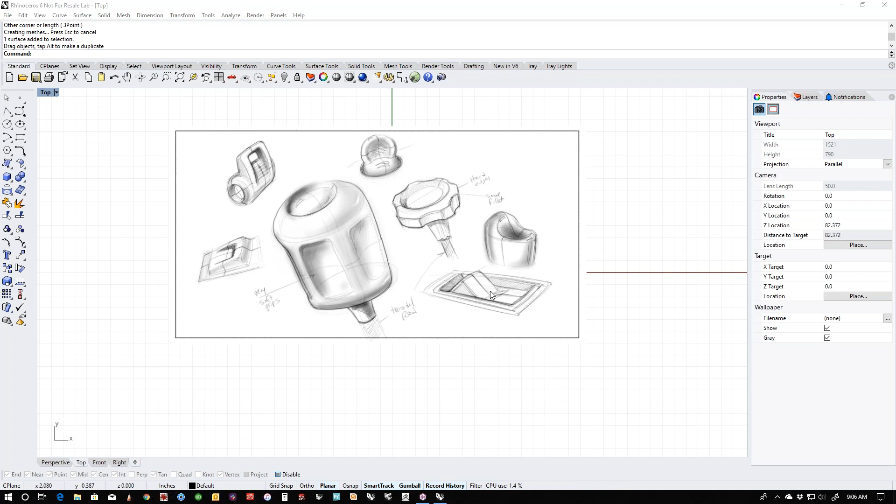So for today, I've decided to do a bunch of little knobs and buttons demo. I've built up a little portfolio of things here that we can take a peek at and try to go through. Each one shouldn't take a terrible amount of time. Maybe we'll get through all of them, maybe we won't. Maybe we'll just pick a few and go.

I'd like to try and get this done by about 10:30 or 11 at the very latest. So we'll start on a few of these and see how the time goes. Maybe we'll vote on which one to do next. But the one I'm going to start on is this guy.

The reason I like this one is because the intention is for each one of these grip faces to be very, very soft. Sometimes modeling soft things is difficult, because modeling sharp things is easy — you don't have to worry about transitions. Just trimming two surfaces together gives you nice sharp corners. Doing soft things can be a little different. So I'd like to start with this one and focus on that.

Then maybe we'll go over to this one, which seems like it would be very difficult, but there's actually a very easy way to do this one, so I want to show that. Then we'll pick a couple more depending on how time goes. Maybe we'll get through all, maybe we won't.

I'm going to stick this over here, and just to start this correctly, the way I start every project is with the picture command. I always start from a sketch, whether it's my own sketch or one that's been given to me. This is just the conversation I have with myself so I can sit down and start figuring out how I'm going to do this.

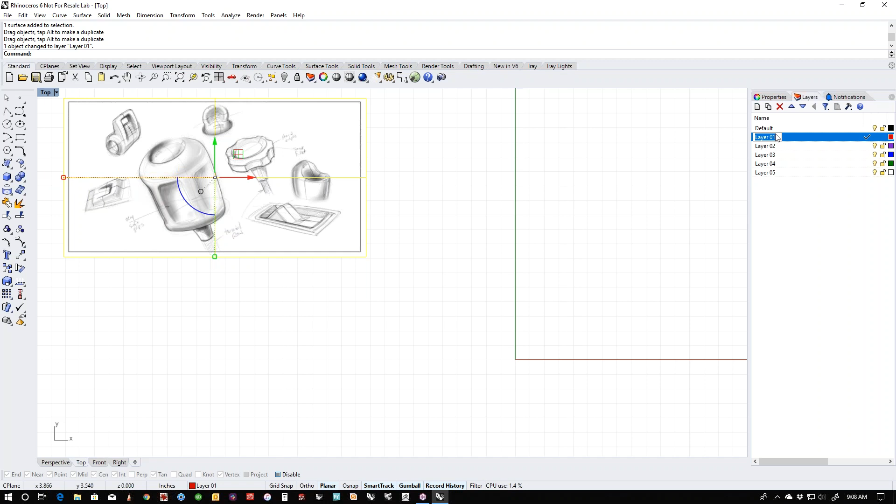So let's jump into this one. I'm going to just tuck this over here for the time being. In fact, I'm going to put it on a layer so I can turn it on or off if I need to. If I click on my layer stack and pick this object, right click and say change object layer, I'll double click on this and change the name — that's going to be the images. Then I can turn this on or off, and I can lock it so I don't accidentally pick it or do something like that. Then let's figure out kind of what we're going to do with this thing.

Basically, anything that's round, we're going to do with what? It's going to be a revolve, right? Let's be honest, there's no reason to do it any other way. Or is there? There's another way to do this that we'll talk about. Maybe I'll do this the revolve way to start with, and then we'll talk about the possibilities of doing this a different way.

Now, before we jump into this, we need to talk about how to make corners, or how to make transitions in NURBS. If I start with a single curve, right, and we turn the points on, this has got 2 points, which means all I can edit is this, or this. That's it, right? I've got no internal structure in here.

So if I want to make a corner, corners in NURBS are made with 3 points. 1, 2, 3 - that's how we make a corner. Now if we have to make another corner going down, how many points do we need? 1, 2, 3, right? If we're going to make another corner going this way, 1, 2, 3.

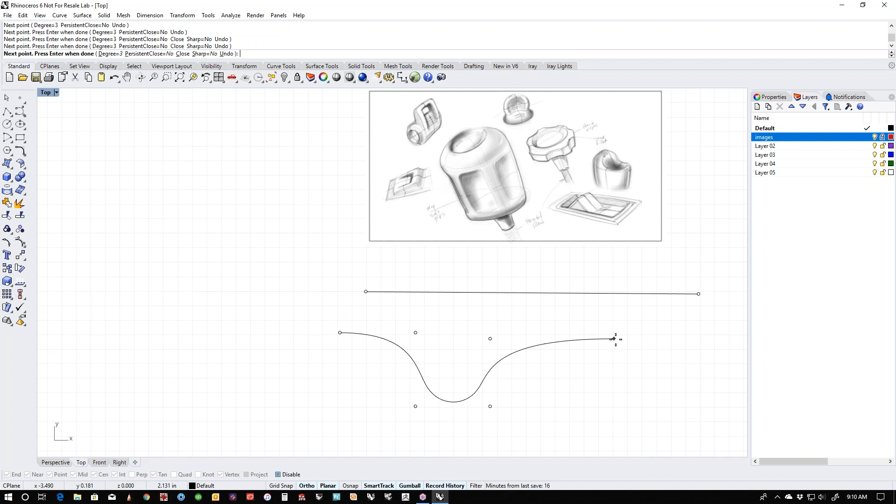We're starting to get the drift here. Now we can do this all in one shot - it doesn't have to be segments. We can go 1, 2, 3. Now we can steal this point and go 1, 2, 3, and then we can go back up here, and then out here. And each transition, if we look at it, is made up of 3 points.

1, 2, 3 makes this corner. 1, 2, 3 makes this corner. 1, 2, 3 makes this corner. 1, 2, 3 makes this corner, right?

Does that make sense? If we wanted to make this sharper, we would start with an anchor point, and then do 1, 2, 3, drag a line. 1, 2, 3, drag a line. 1, 2, 3, drag a line. 1, 2, 3, right? Corners always have 3 points.

They have to. If we want to make them sharper, we pull them closer together. If we want to make it softer, we pull them farther apart. But always 3 points - that is the formula for a corner.

Now, knowing that, when we build this part, what do we need? Let's go back to this. If we look at this curve, there's a little flat here - maybe it's a flat, maybe it's a round - but there is an obvious corner here, and then there's a dip, which we're going to call a corner, and then it comes back up. We're going to call that a corner, and it comes back over. So this shape is going to look like this.

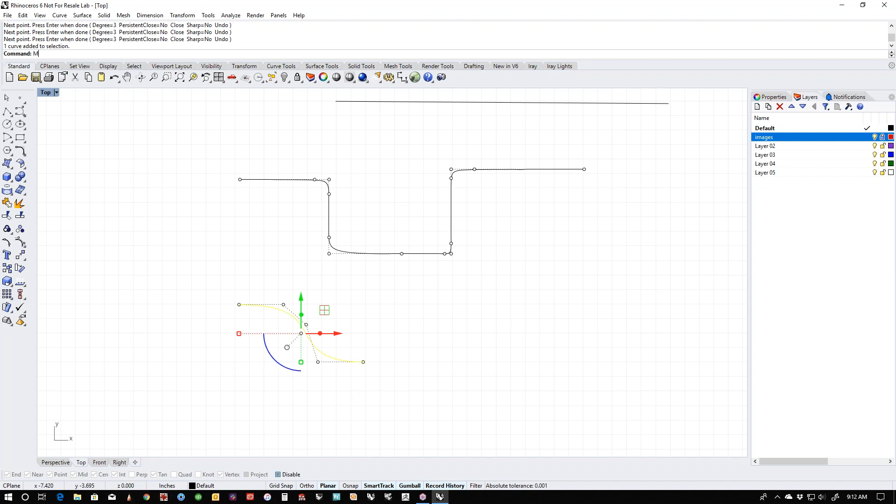Let's call this our flat and say 1, 2, 3. And then I'm going to steal these points, 1, 2, 3. Let's call this our profile. And if I mirror this, and for tangency's sake, if I pick all of these points, notice how there's no handle here? In order for these points to be tangent, they need to be in a straight line.

And we can prove that by drawing a straight line. See how these are all lined up? If this point was here, these curves are not tangent.

And we can prove this if I run the GCON command and pick here and here - these curves are actually G2. It's saying I'm getting a curvature match off of this, even though strictly speaking it's tangent because it's G0, G1. The G0, G1 points are lined up. But because this is the same curvature going in and out of the curve, it's actually calling this transition G2. I'm not going to get too far down into the weeds with that.

But let's call tangent the 0 and 1 point. Let's call this tangent if these are lined up. Still tangent as long as they're lined up in this direction. Still tangent if they're lined up in this direction. Still tangent if they're this far away. Still tangent if they're very close.

As long as these 3 points make a straight line, you're tangent. So with that understood, now we need to do some counting. For each transition, we need 1, 2, 3, 4, 5, 6, 7, 8, 9, right? 1, 2, 3, 4, 5, and then 1, 2, 3, 4, 5. So we really need 9 points total if we're calling this one a coincident point.

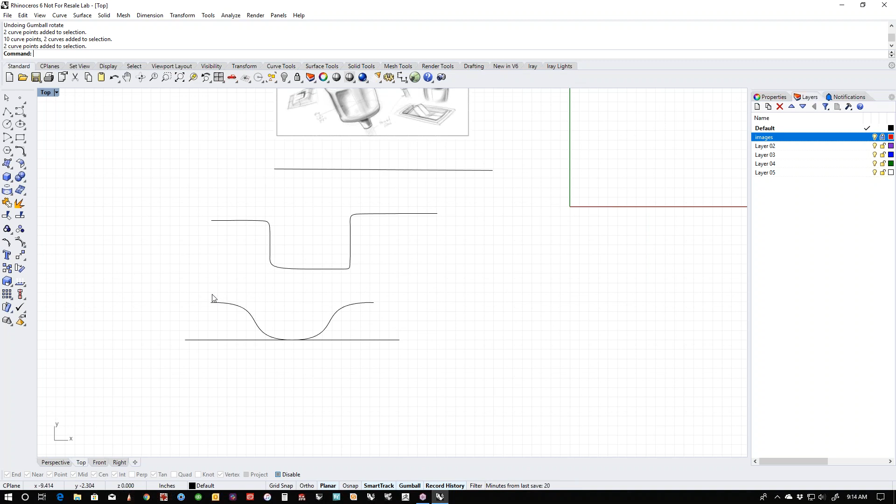Now, 9 points times 6 dents is going to be what? 9 times 6, right? So if we were to take this and copy it from here - 1, 2, 3, 4, 5, 6, right? 1, 2, 3, 4, 5, 6.

This is how many points that we're going to need. Now, assuming that these points are joined, if I take this and join these all up, it'll give us the right point count. Or we could do something silly and just add it. But if I join this all up and turn the points on and do this, it's got 49 points, right?

And if we count: 1, 2, 3, 4, 5, 6, 7, 8, 9, 10, 11, 12, 13, 14, 15, 16, 17, 18, 19, 20, 21, 22, 23, 24, 25, 26, 27, 28, 29, 30, 31, 32, 33, 34, 35, 36, 37, 38, 39, 40, 41, 42, 43, 44, 45, 46, 47, 48, 49, right? You're like, wow, he can count.

So we need 49 points in order to be able to make this type of shape. So it's a long way to get there.

Stay with me. If I take a revolved surface, how many isoparams, because isoparams equals points, right, how many isoparams am I going to need in this revolved direction? The correct answer is 49. What that's going to allow me to do is then revolve this thing, pick the points, and just scale them. And when I scale them, we're going to get this type of shape.

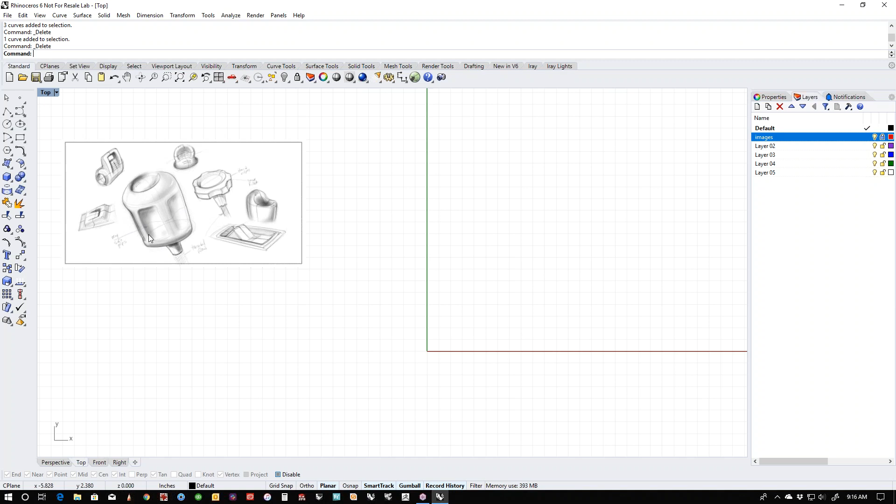Now, so we know we need 49 points in this direction. How many points do we need in this direction? Well, that's a good question.

If we were to start up here at this surface, because this is going to be a straight line segment, this is going to be a little arc to get that shape. If we were to start here, there's a round here, right? So we're going to need 1, 2, 3 in order to get this shape. And then there's a corner here, right? So there's going to be 3 more here. And then there's probably going to be 3 more at the bottom. So what's that, 9 now?

We're going to probably need 3 more at the bottom here to come up. So that's 12, 13, 14, 15. And then probably a straight line, so 16, 17, 18, 19. We're probably going to need 19 or 20 to get this shape because I'm going to need enough isoparams in here to be able to grab points in this area and pull them in.

So let's give it a shot. Let's just draw this thing starting. I'm going to start up here. I want to give myself enough space to make the arc. So I'm going to start here and say 1, 2, 3 to get my big roundy. And then I'm going to turn the corner and then I'm going to just draw it as a marshmallow for now because we can always rebuild.

And I like to do things as simply as possible. I'm going to bring this over to here, something like that. And then I'm going to add a line up here for this piece. And then I'm going to add the little hosel down here, something like that. That might be really thick. Something like this.

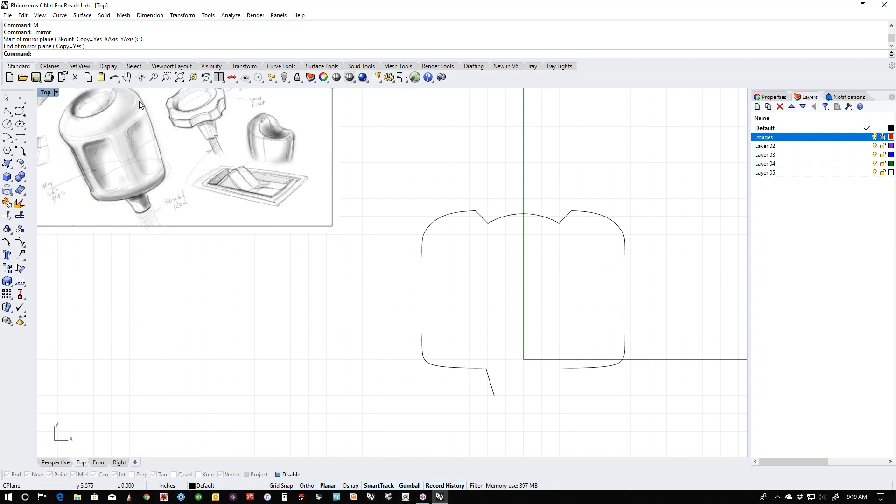The other thing that I might want to do is mirror this just to see how fat this thing is. And this is looking massively fat. Like this is kind of normal, a little narrower. So let's edit this. I'm going to turn the points on and just pull this in a little bit, make this a little narrower. Maybe it needs to be a little taller to get the proportion that we're looking at.

And granted, I don't have enough points in here to make this shape, right? And I don't want to just spin this shape because I need these pieces out here.

So maybe what we're going to do is, first of all, I'm going to make myself a center line and get rid of all of this because I don't need it anymore. That was just for reference. I'm going to take all this stuff and join it. Actually, I'm going to bring this and close it too because I want this thing to be closed. I'm going to take all this stuff and join it.

And then let's go ahead and just revolve it. And let's see where we are. Let's just take a look. So we're going to come down here and just make a simple revolve.

We're going to make it full circle, so we'll just type U, enter. If you look in the command line, each letter is underlined - the F in deformable, the U, the A, the S. If you type U and hit enter, it invokes that command right out of the command line. It's a really fast way - you don't have to go up and click, you can just look and say boop, and get it to go.

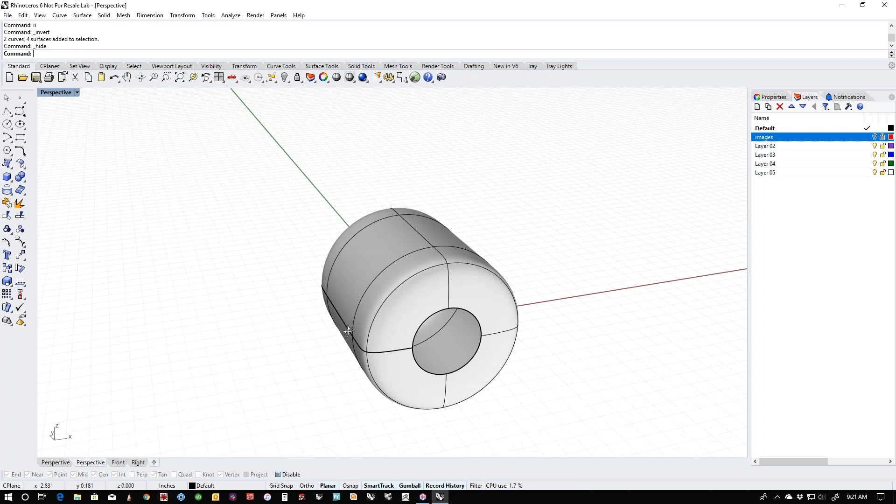And I'm going to hide everything. By the way, I have a hotkey set up for the isolate command. If you don't know it, pick this and type isolate - I'm working in version 6, by the way - and hit that, it gets rid of everything except what you picked, which is super useful if you're like me and can't stand clutter on the screen.

I gotta grab some coffee. Hang on just a second.

All right, so we've got this thing. Let's turn the points on. You can see if I select any of this, pick this, SelU. SelU is the command to select all the points in the U direction. How many points do we have going on here, right? And I can do that by typing what?

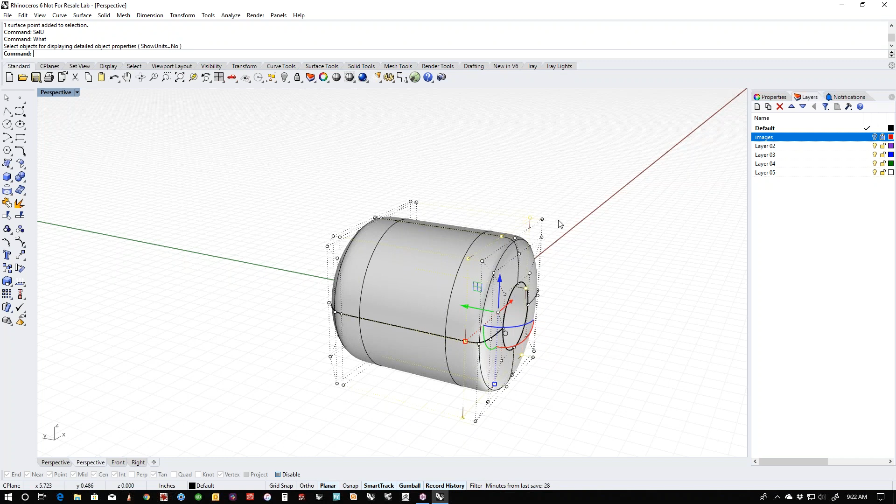SelU - it should tell me how many points are selected. It doesn't. What doesn't work on that? Come on. Nope, got to be just the object. All right, never mind, so let's do this.

I want to drag select them so I can see how many points there are here. I could count, but I'm lazy. So there's 8 surface points here, and we decided we needed how many? We needed 49, right? So that puts us in a position where we have to rebuild this thing.

So let's rebuild it. We know that in the U direction and the V direction it says 8 and 8. In the U direction, which we've already determined is this way, we need 49. And we can preview it and check that.

And then how many points did we decide we needed in this direction? I think we decided we needed like - 1, 2, 3, 4, 5, 6, maybe 7, 8, 9, 10, 11, 12, 13, 14, 15 - let's say like 15. Let's try 15 and see what we get.

And we want to change this to 3 and 3. Let's preview it. That's about what we're going to want, right? And look at this - look at all these wonderful points we have to play with.

Now here's the trick: we need to be able to select these points in order to modify them in a way that makes sense. And because there's 49, we want to pick these, and we want to end up with 6 total.

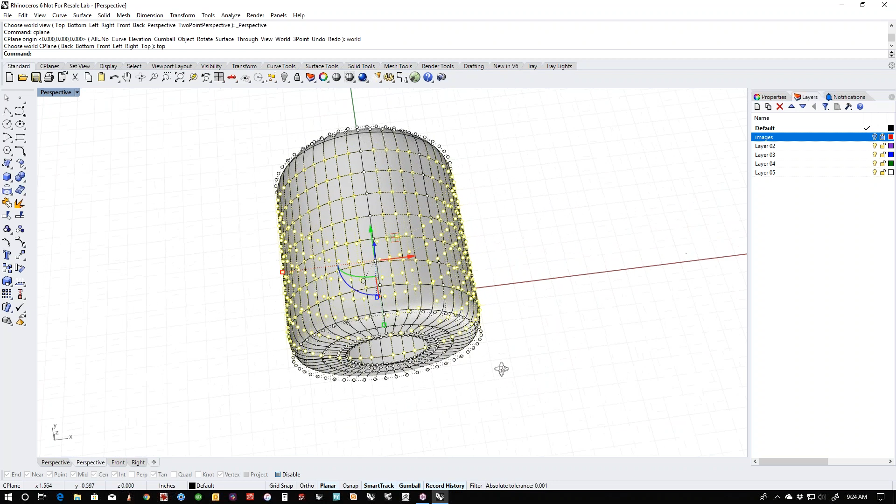So let's pick this. Now, just to show you what we're going to try and do, I'm going to deselect everything else - the other way we could do this is we could just model a section and then mirror it, which might be the way we end up doing it. Like I said, I don't practice this stuff, I have to figure it out along the way.

So if we grab this and I were to scale these points inward, right, then I would get - and if we do this scale, actually let's do it with the gumball, because I like using the gumball instead. So let's relocate the gumball.

Gumball relocate is the command. And the gumball origin is going to be in the center of this object, if I can get it to snap to the center. And if it won't find the center, we'll make it find the center by doing this. Actually, the origin is the center, isn't it? That would make sense.

So let's grab this again. Let's grab these, and make sure we're getting the same amount on either side of the center line.

Let's get rid of these. Yeah, because this is my corner, right? 1, 2, 3 - these points here can determine how sharp this corner is. These points up here determine more or less how sharp this corner is.

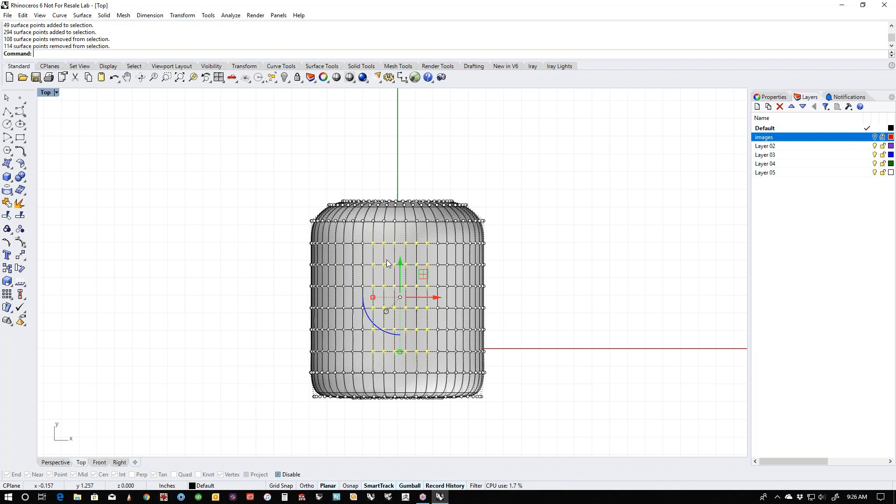So let's do this, and I'm using Control to deselect. Let's just make sure that on the same side of that we have an even number, right? 1, 2, 3, 4, 5, 6.

And if I get rid of those down there and I relocate the gumball to 0, that's going to put me right in the center of this object. Now, if I shift scale this, look what happens - I get my really nice transition. Now, am I stuck with this?

No, because I can do things like this. I can come in here and grab these points. And if I was really trying to be fancy, I would try to do all this at the same time. But if I pull this up, see how this affects that corner up there? And if I grab these...

This might be easier to do in wireframe, but it's harder to visualize for you guys for the webinar, so I want to just keep doing it in shaded view. These control this down here.

This row - remember we talked about that curve - if we pull them apart, it gets softer. If we pull them closer together, they get sharper. So this row...

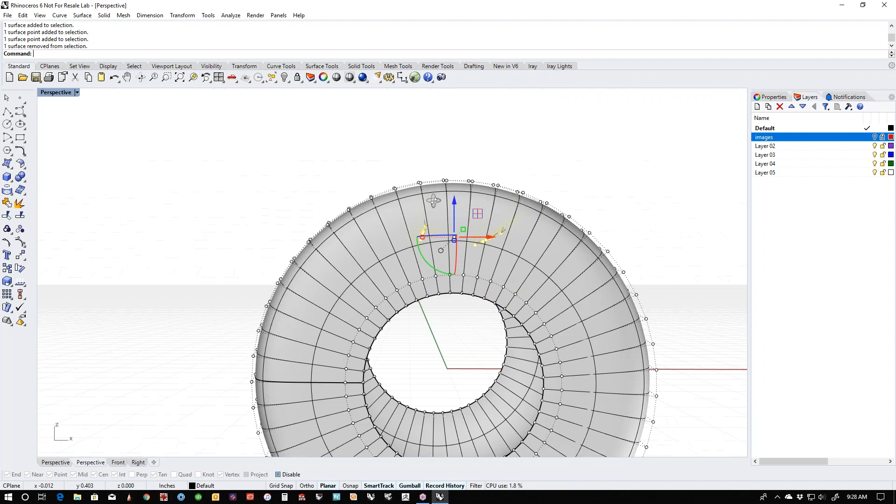So if I'm messing with this row and this row, let's make sure I got the right one. No, I don't - let's make sure. Let's do this. Doop. It's this row that we want to mess with. So I'm shift clicking each one of these to add.

Sometimes the gumball handle gets in the way and you have to wiggle it a little bit to get around it. And then I'm going to scale this in this direction. See, I can make that really sharp or really soft.

So just by manipulating these points, I can determine how soft or how sharp I want this to be. And if I pick these things and now mess with them, I can come in and design this thing in 3D. If I pull it up...

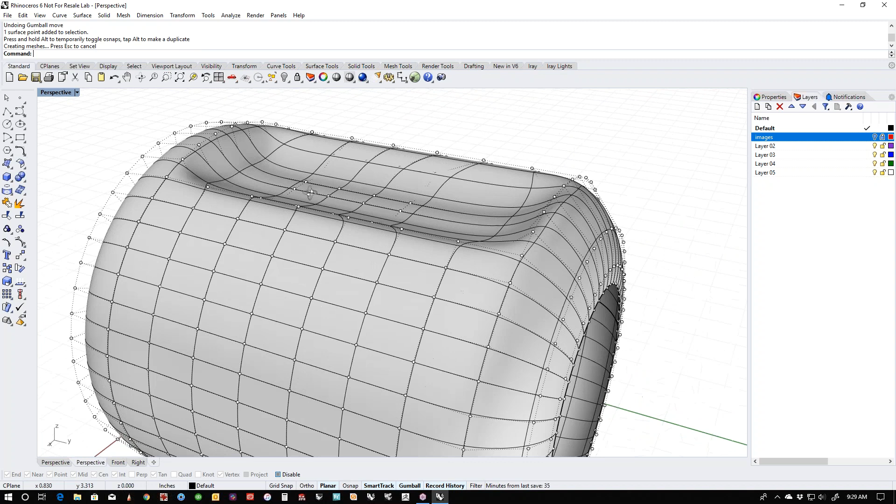Let's make sure we get everybody - that one's hiding behind the scale handle. If I pull this up, see how that softens? And if I pull it down, see how it sharpens? So I can kind of tune this thing to get it how I want, and then decide where...

I want all this stuff to fall. And so just by dragging some points around, I get a lot of ability to be able to determine where this stuff goes.

Now, here's an interesting thing that just happened. See how I grabbed these points, but I missed this one? Watch this - if I grab this guy, if my gumball is set to snappy dragging, it will respect O snaps, meaning that I can just drag it up, hold down my O snap. I run my O snaps disabled, by the way, and the Alt key is the temporary enable/disable. So as I'm dragging, if I hold down Alt, it'll snap together.

Now another cool trick is if, let's say, this guy is out of line with these guys, I can scale these to 0 in one direction, which will flatten them and then snap it back into line with the other ones. It's a nice little modification trick. Excuse me.

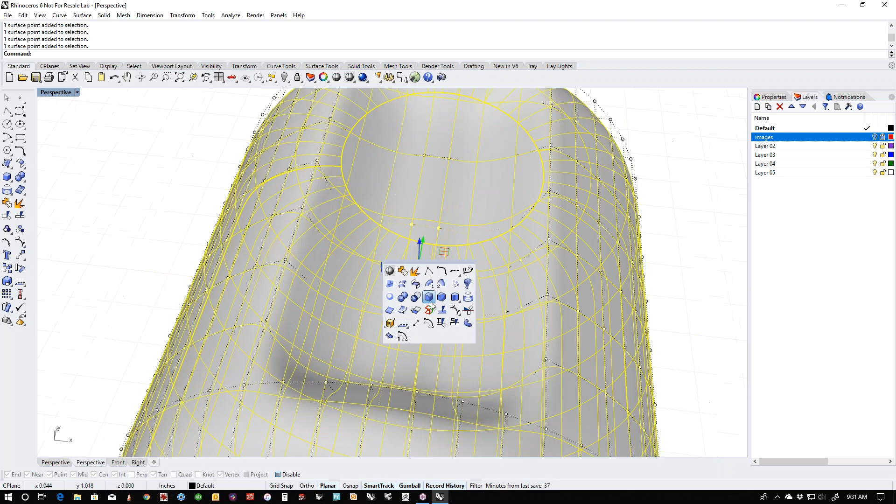All right, so let's shade this and see, do we like that? Is it the right shape? Is it too deep? Is it like maybe these guys, we want to punch them in a little bit? And do this in wireframe so I can see what I'm doing. Got to catch the ones that are hidden behind the gumball handle.

Because we know how the numbers work, we can modify this stuff and know exactly what we're doing. So now this is going to be dished in, now it's going to be pulled out. We can play with it and really get a nice little pocket in there.

Since we know what this is like, we could go ahead and model this in all the way around, or we could be super lazy and just scale that, or just do an array. So let's take this and make a polar array at 0. We want 7 items, right? Or no, 6 items. We wanted 6 items. And we're going to polar array this thing.

Now this isn't in the right orientation, so I'm going to take all of this stuff, because I did it with history on. See this? I can take this guy and revolve it, or rotate it, out here like this, and I'll just snap it to that point. And then all the rest of them are going to update, and that's not quite what I wanted.

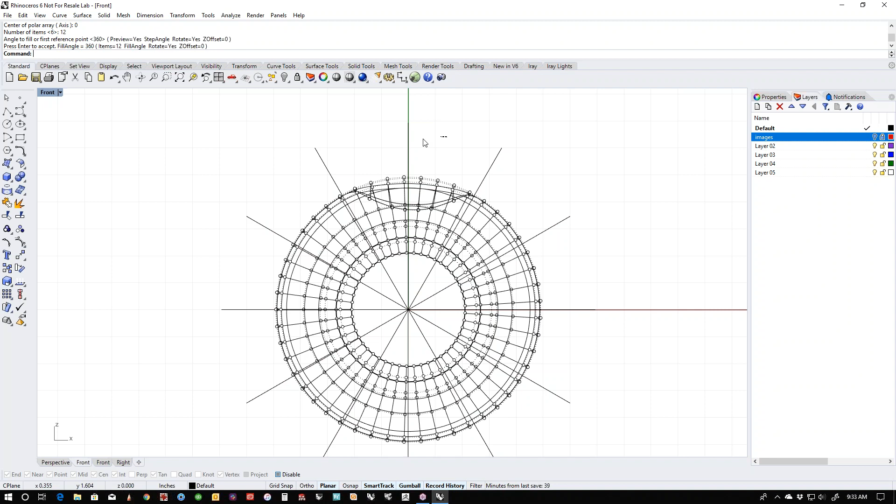And what 12 is going to do is give us, this is the center of this thing, and these two are the ins and the outs. And you know, maybe these points, see how these points aren't exactly lined up at the center?

So maybe what I need to do is take this and rotate it to snap to here, and then see how that's centered now. If I'm calling this the center of my dip, I could probably be fancy and figure that out, although it looks like it's not. Actually, it looks like what I need to do is be right between these two, isn't it? Because it's that and that over there.

So let's do that. Let's rotate, and I'm going to use the between switch. Watch this—I'm going to hit P, enter, and place it between these two. Oop, moved it, sorry. Center of rotation, this is the first place. The second place is going to be between here and here. So now that's centered, and I can take this and trim everything else away.

People are like, you weren't kidding about not rehearsing these. Yeah, I'm not. And I've got my one little segment.

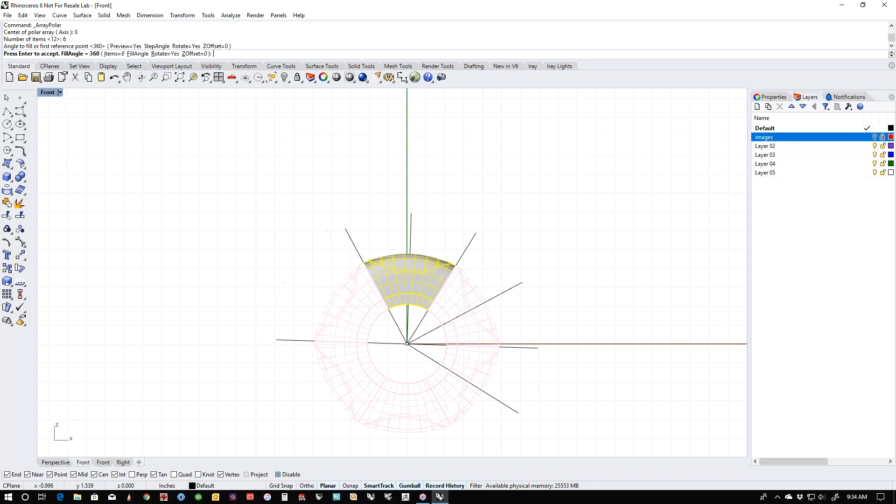Now, if I go back to my front view and array this around 0, 6 times, it worked. No one's happier than me. We get this.

Now we join it. If we're living right, this is all going to join up with no pink. We bring back the rest of our stuff. This joins up, this joins up. Let's hide everything else, isolate, and then let's take a look at it. What else do we need to do to this thing?

Let's break this edge, and I'm going to do that with a fillet—actually, I'm not going to use a fillet. If you right-click on this, you get blend edges. The blend edges is different than fillet. Fillet is circular, it just takes a circle and shoves it in the corner, right? It doesn't have any respect to tangency or anything like that. In fact, fillets are usually at best G1, most often G0.

Blend, on the other hand, if I right click this, it actually does it by continuity. Oops, got a little edge there. I'm going to chain the edges so I get everything. And then the radius on this is 1 unit.

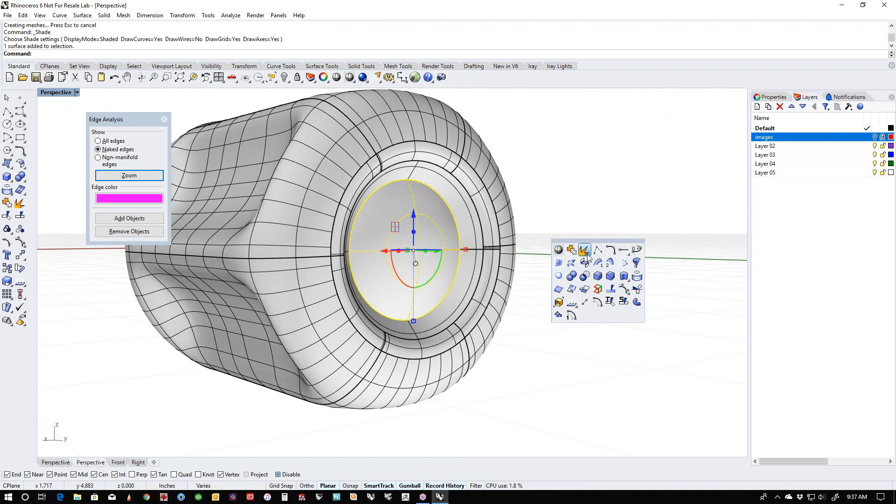And that gives us a nice soft edge. We can even go one step further—I'm assuming this is going to be like a logo insert or something. So maybe what this even needs is a pocket with a secondary little lens or something, which we can do if we break this out, take this, pick it, and start dragging while holding down the control key.

It actually extrudes it. Let me isolate that and show you again. If you don't use this trick—pick on it, start dragging, hold down control. See that line that shows up? Boop, we just extruded that thing.

Now the cool part of this is I can take this and break this off, bring this back and hide that. And you can see this is the pocket that we built. And maybe there's a microscopic little fillet on this, because that's how the world works.

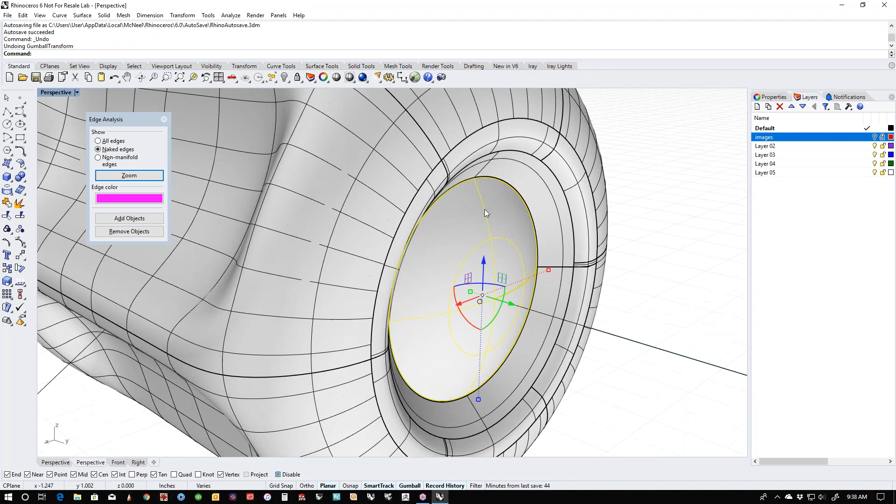If we're really getting fussy, there's no such thing as a 100% short corner or 100% sharp corner. We bring this lens back. I'm going to scale this, shift click, 0.99. Just a teeny tiny bit, maybe not even that much. Shift click, 0.999. Just enough so that I have a little clearance. Maybe that's not enough. Let's say 0.995. See how it just gave me a tiny little bit of breathing room in there?

Then let's go to the right-hand view. I'm going to do the same thing I did before. I'm going to start dragging and then hold down control, and I'm going to compare it to that. I'm going to just kind of bring it so that it just kisses that.

Because I want to be able to, maybe I want to print this thing in plastic and print this in clear, and I want to have that be something that I could put a label or something. This is going to be clear. And then I take this and it sticks in here like this, and it's got a little logo with a little clear thing over it.

Okay, now the last thing we're going to do, I'm going to delete the curves for now. Usually what I do if I'm working on a client project is make a curves layer and dump everything there. The reason I do that is because if your clients are anything like mine, they say we love it, except we'd like you to change everything. So if I have my curves, it makes it easy to do, and we'll go from there.

Now I want to break this edge. I don't like that, so let's blend this thing. I'm going to chain edges, gets everything. Whoa, since I have preview on, see how that's crazy? I don't want that, so let's bring this down. There we go, that's much better. Preview's nice because it's non-destructive, you can try it and see what it's doing.

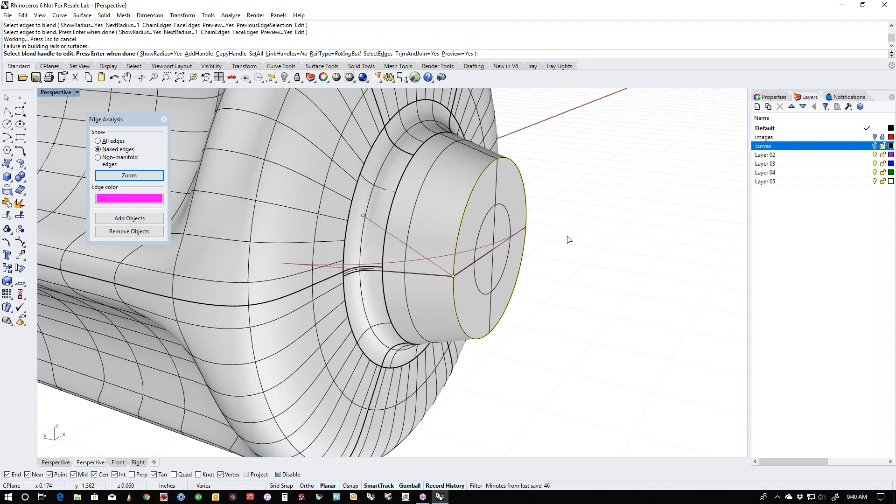And then I'm going to break this edge too, and that's obviously way too big, so I'm going to drag this down. Now, if I was doing this for a production piece, I would actually pay attention to what these numbers are. Let me see if I can do this in wireframe so you can actually see this. See how this number, as I move up, you can read what the numbers are, and if I look visually and say that's about the right fillet.

If this was up here, right, and it was .037, what I decided I wanted, I wouldn't do it at .037, because if this were to be CNC machined, I would have to either go in with a .03 tool, which would be a common size, and do a couple of passes through here, or I'd have to get a custom tool made, which the tool maker is going to hate you for, a .037 tool to cut that in a single pass.

So let's be easy on our tool makers, and let's say I'm just going to push that to .03. That is a common tool size, and I know when I send this to my tool maker he's not going to go, what are you kidding me, there's a .0373216 radius fillet in here. He's either going to do it and charge you for the custom bit, which makes your job more expensive, or he's going to call you bad names, which is usually what tool makers do. No disrespect, that's well within their right to abuse designers.

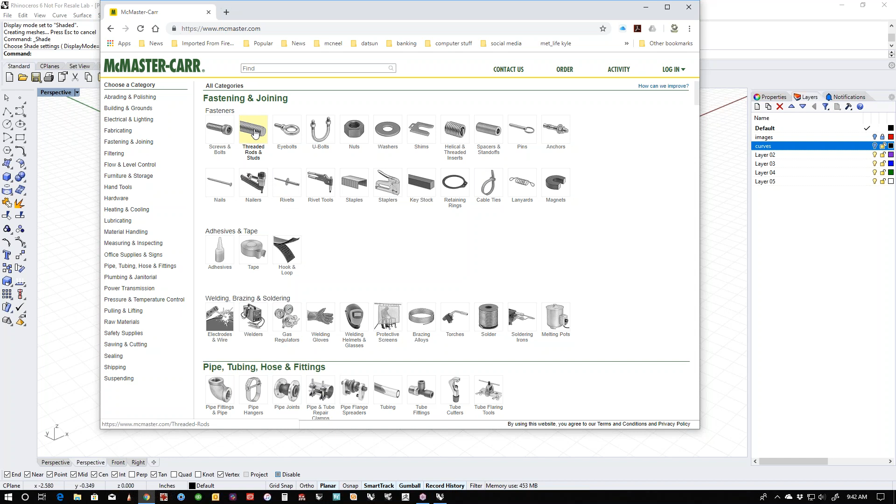There's a website, a company here in the U.S., for those of you who are outside the country and maybe haven't heard of these guys. They're in Elmhurst, Illinois, founded in 1901, a privately held company called McMaster-Carr. If you click on this, it brings you to the holy grail of all things fastener. If I go to threaded rods and say threaded rods here, who cares, let's just go with this, and I want this to be, let's go back one because I want it to be metric.

Let's go metric. I want this to be a metric threaded rod. I have no idea how big this thing is. Let's find out.

I probably built this massively, but let's go from here to here. So it's 0.39, so it's like 0.8. I think this is inches. Let's make sure - tools, options. Things you check beforehand. Yeah, this is inches. So like 0.8 is about the size of this thing, somewhere in there.

Let's see what a diameter of 10 millimeters looks like. That is probably a little small, so let's see what a diameter of 12 millimeters looks like. That'll probably do it. So we're looking for like an M12 bolt or a threaded rod.

So let's go to M12, and let's say it's going to be 300 millimeters long. It actually doesn't really matter. Let's get a longer one, say 500 millimeters.

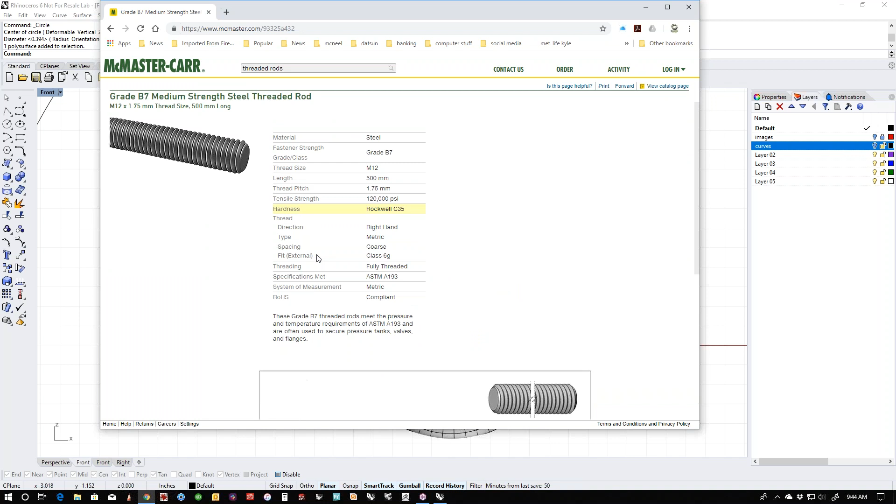Here's where the magic happens. Product detail - click. Look at this. What format would you like a 3D model of this bolt in? I would like it in 3D step, please. Save, download, show in folder.

Drag into model, import. Ta-da! Now we have - and the cool thing about this is these are really good models. If I look at this thing, it's got no naked edges, no non-manifold.

And if I take this thing and just go derp like that, take this, and boolean subtract it, because that's the way this thing would be made in real life. So now here's the cool thing - this now has perfect M12 threaded rod threads in it.

So I can print this thing. I can go to McMaster-Carr and buy this piece of hardware. When the piece of hardware comes in the mail and this comes out of the printer, I run an M12 tap through this just to clean the threads up from the printer. This will screw in with your fingers. It works perfectly, and you will never model threads again. You're welcome.

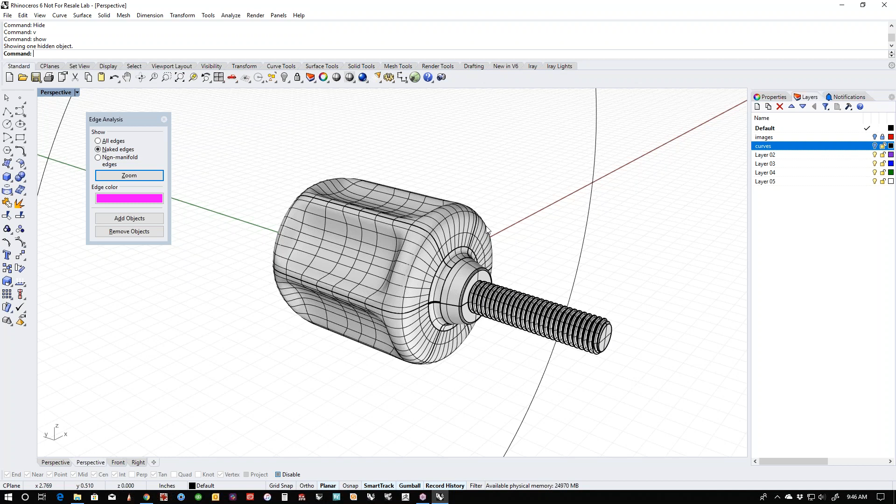Same thing with nuts, bolts, inserts. I downloaded a pile of these things, so I actually have threaded rods that I use as cutters. Anytime I need threads in a part, I just take one of these, jam it in there, boolean it out, and then when the print comes out, I just run a tap through everything, and the stuff screws together with your fingers. It's brilliant, and I don't mind claiming it as my own.

All right, how are we doing so far? Everybody happy? Any questions? By the way, these sessions are meant to be interactive, so please, if you haven't been to one of these before, I highly encourage comments from the peanut gallery. Feel free to taunt, ask questions, point out things that I'm doing that are stupid, make fun of me because you're watching me try to do math live in front of an audience. It's the reason I went to art school, people.

All right, we cool with that one? So we're gonna call that one done. Woo, 9:47, we knocked that one out quick. So let's change the object here and let's hide it. Let's bring our images back, and I'm gonna hide that one, and let's stick everything on this layer.

All right, what do we want to make next? Should we make a super easy one? This one's pretty easy, and the reason I like this one is because it's got a domed surface on it. So let's build this one next, and then I'll let you vote on which one you want to go from there. Any questions so far?

Questions, comments, taunts? So this one is actually pretty easy. We can do - this is fairly flat. I'm reading that as fairly flat or poorly drawn, always have to decide. This is fairly flat, this has a fairly sharp angle on it, but this has a little round to it. So what we're going to do is actually build this - the round first - and then we'll do trims, and then we'll extrude the whole thing. We might even do a shell to assume this is an injection molded part. This one would probably be a cast part. I actually have an exercise bike that has a knob like this, I was looking at it the other day thinking I wonder how you build that.

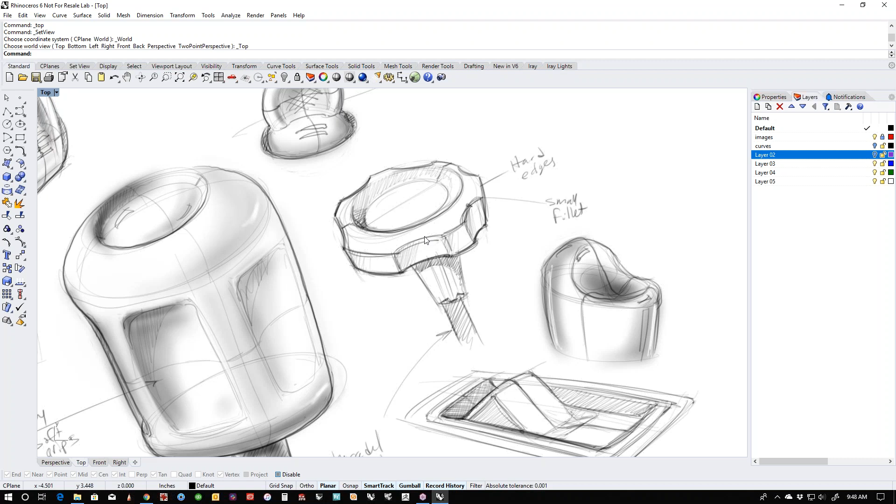Now we know. So let's look at this thing, and we might even throw the shell tool on here and do some ribbing and stuff like that. So let's make that a little bit more interesting, and then maybe we'll jump into this one, and then I'll let you guys pick which one you want to do next. So this one, let's start with a center line.

So I'm going to start at 0, and I'm going to come out, and then I'm going to come up. And if I was going to be sassy, I could even do a grid snap on this.

Let's do the same trick we did before. I'm going to mirror this. The only reason I'm doing that is because I want to use a 3-point curve. I could do this with a circle too, but I like the 3-point curve. It's always been good to me.

So let's snap this. We know the center is right here. And then let's take this thing and shift drag to scale it out. When we shift drag to scale it, we know it's going symmetrically. And then let's trim it.

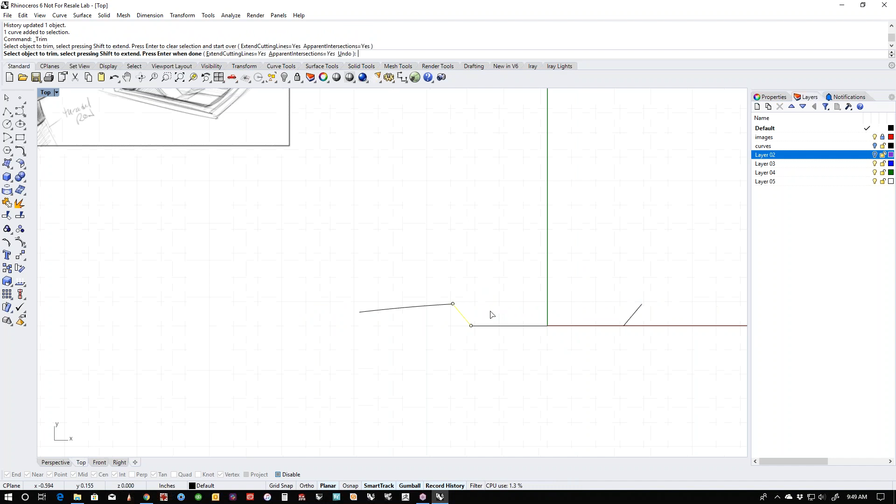I can get rid of this because I don't need it anymore. And that's our nice little dome shape. So let's take this and join it up. Go to the perspective view. Let's revolve it.

I'm going to use the end of the revolve axis. Press enter to use the C plane Z. C plane Z, full circle, enter, and there's our shape—except I revolved it in the wrong direction. Derp. I drew it in the top view and then revolved it in the top view, so that doesn't make any sense. So watch this.

If I take this guy and relocate the gumball to here and rotate it 90 degrees, because I did it with history on, watch this. Boop, now it behaves.

That's the right direction. All right, now we're going to do most of this without any modeling tools. Check this out: Shift, Control, click. That selects the edge—that's called a sub-object selection. If you haven't done this, you can Shift Object select parts of a poly surface. This is the whole poly surface.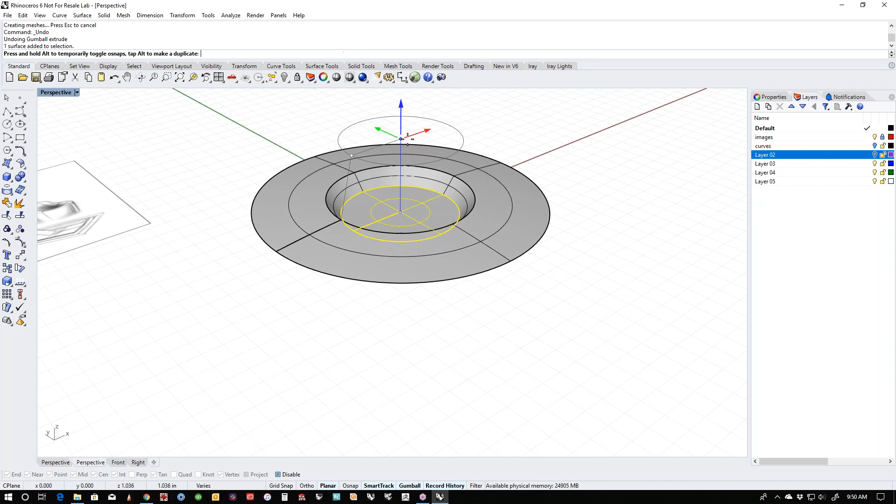Shift object select, select—I can delete with the sub object. I can edit with the sub object. I can copy by tapping Alt. All sorts of stuff with sub object. These are gumball magic tricks.

There's a really great video by Brian James. If you Google 'Brian James Hello Gumball,' it'll show you a great video he did about all this stuff. So, shift, control, click.

See this little dot in version 6? If you don't have this, if you're using version 5, this is just control drag, or drag control, sorry. In 6, just click the dot and drag, and it will extrude that edge. I'm going to join this up, cap, and then I'm going to shell this thing.

Now everybody gets all excited when I show the shell command because they're like, oh my God, I didn't know Rhino had a shell command. It does, but calm down. It's not amazing. It works great for simple stuff, but if you want to do like a 2000 surface model and shell that, I got news for you—you're going to get something, but you're going to have to do a lot of repair to it. And that's fine, because Rhino, when it fails, it at least fails and gives you something.

It's like that old Monty Python sketch where the arrow hits the messenger's chest and he goes, 'Message for you, sir,' and then dies. That's what Rhino does, right? If you say shell on something super complicated, it's going to go 'Bah! Here's your shell,' and then it's going to die. And then you're going to have to go in and actually fix it, but you'll have something to start with.

So let's shell this. This should work. I don't want a thickness of 1. I want a thickness of like 0.15—let's make it a little burly. And then this is the face I want to get rid of. And it shelled it pretty effectively. I'm pretty happy with that.

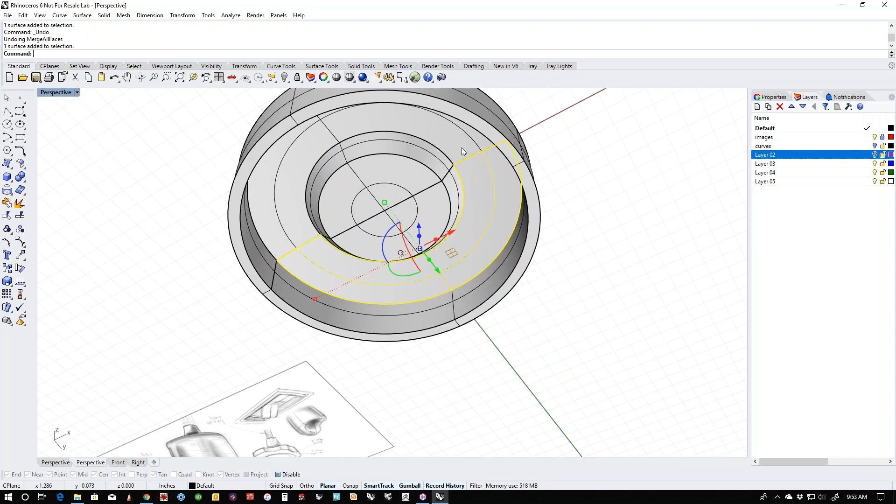Merge all faces. When I merged all faces, it took this from 2 surfaces and made it into 1, because what merge all faces does is it goes and finds everything that's a coplanar surface. See this? This is 2 surfaces, but they're coplanar. 2 surfaces, but they're coplanar.

Merge all faces. Well, one didn't, but this one did. Now I can Control-Shift-Click, see the dot comes back? There's my center section. Now, the drawing shows this tapered.

So let's taper it. Shift, Control, Click, Shift, drag, and tapered.

Now, I probably jumped the gun here because I got excited about showing shell and I jumped ahead. We forgot to put these in. So let's go back. Control Z, Z, Z, Z. Let's put these in, and I'm going to just do that with a circle.

I'm going to snap it to here, shift drag, drag it down to about here, transform, array, polar, and how many are on here? 1, 2, 3, 4, 5, 6.

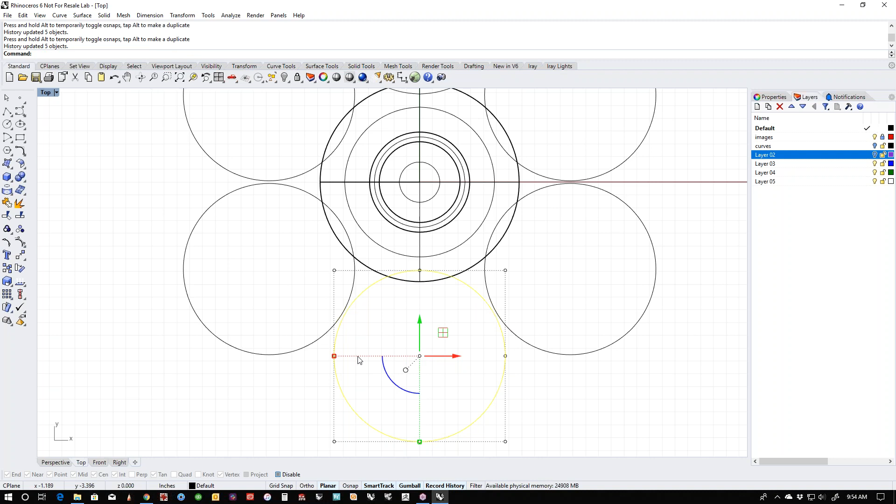All right, now let's take a look and see whether this makes sense. Now this is tiny, I don't like that. So I'm going to pick the original one, which is this one, because we did it with record history. And I'm going to drag this away a little bit. See how it's opening that up because they all updated? And maybe I make it a little wider.

I'm happy with that. So let's do, I could wire cut this, but then I'd have to wire cut, wire cut, wire cut, wire cut, wire cut.

Watch this. If I grab all my curves, curve Boolean, if you haven't used this, you should. Delete input all. Click out here and in here. And it makes one big curve that I can pull up and then extrude.

And then I can grab this thing and I can cap it. And it didn't make the cap the way I wanted it to make, so I'm going to do it with the planar surface.

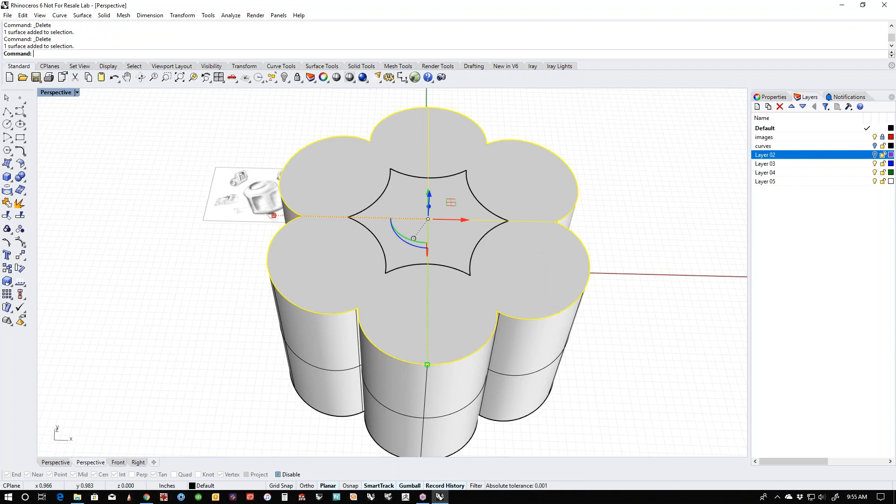And I'm making myself a giant cookie cutter. Making myself a Boolean object. Not you, no one invited you to this party. All right, it worked down there.

These might not be lined up. They are. So let's see.

Okay, you're misbehaving. So why did it do that? I don't know, to be honest with you. It shouldn't, it should find its way. But it didn't, so we won't be too sad about it. We'll just trim it and do it manually.

Close poly surface. Boolean subtract this from that. Delete. There's our object. So much easier than trying to do all that other nonsense.

Now let's shell it. Boop. Now let's merge all faces. Now let's Control-Shift-Click, drag, Control-Shift-Click, Shift Scale, and we're good.

Let's bring this guy back. Let's steal this threaded rod. Let's drag it to the center.

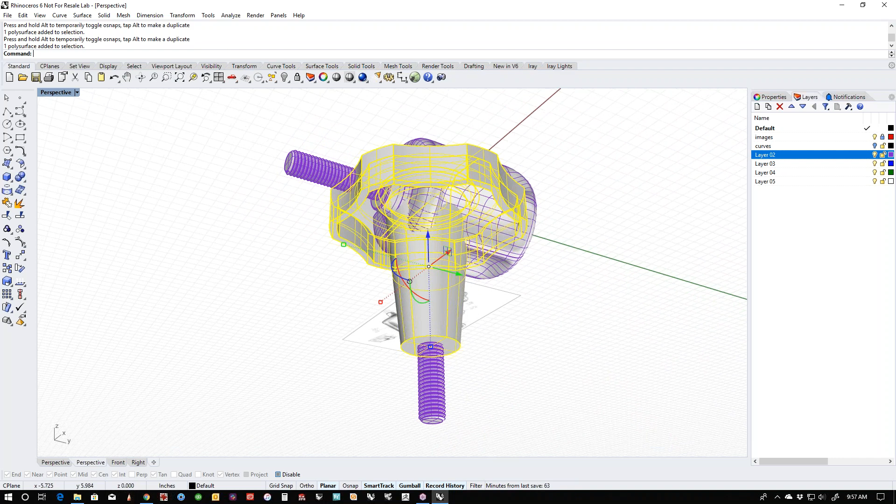And there's that knob. Now, should we put some ribbing on this? Why not? Let's do that. So let's extract this object.

And I'm going to just cap it. Seems counterintuitive, but I'm going to cap it because what that's going to allow me to do is I can pull isocurves from this.

Let's do, I want an isocurve, not an edge. Pull an isocurve using this. And I'm going to put one like here. I should get nutty and measure this, but I'm not gonna.

See where I'm heading with this? Shift drag, click, shift drag. Trim these together. Trim that together.

And I'm going to explode this now. And I'm going to join up these curves, and I'm going to just trim this. I'm going to just make it easy on myself.

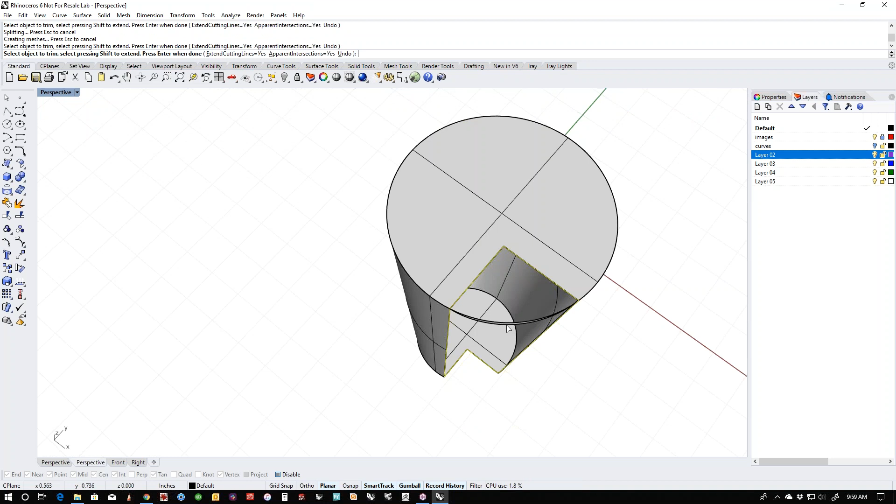Now, you might notice that trimming misbehaves if you do it in 3D space. The reason for that is it's trying to project to the construction plane. So the best way to do this actually, and it worked out here, I got kind of lucky that it worked out like that. But if it doesn't, if you try and trim something and it goes crazy in 3D space, the fix for that is to use this, set C-plane to view.

So watch this. If I draw a curve through here like this, and it seems to make sense, I should just be able to trim right through that thing, right?

My dog's gonna bark, sorry. I've got a cleaning person coming. I'm gonna stop for just a second, let her quit barking so I can edit this out of the video. The second I start up again, she's gonna bark again.

All right, so if I have a curve through this thing, and I try and trim this, watch what happens. See how it doesn't know what to do? If I take the C-plane and change it to this eyeball icon, now the C-plane is what I'm looking at, so when I trim, it kind of knows what it's looking for. My rule, for the most part, and I broke my rule when I did this, is always trim in orthogonal space.

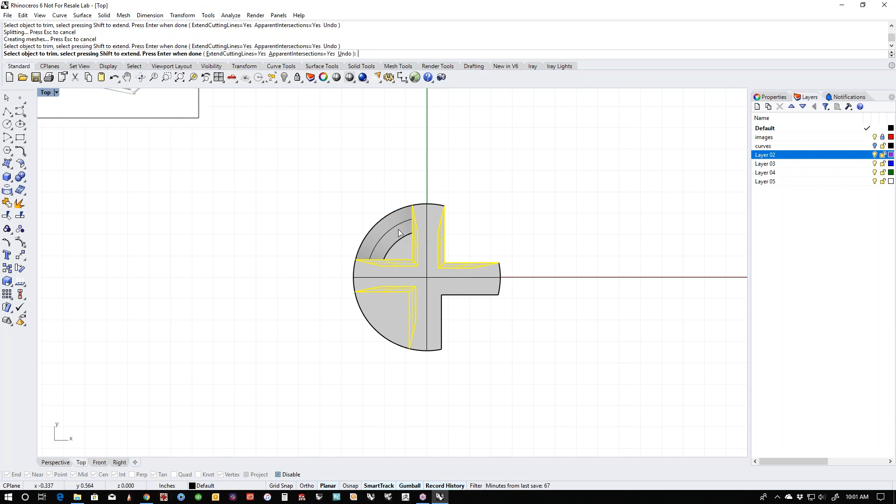This works best if the thing's exploded, by the way. Join that. I'm going to knock the top off because we don't need it anymore, it served its purpose. Bring this back, hide this guy. Now, if I join this, there's going to be openings, right? We'll look at show edges. You can see it's joined here, but it's open here. We'll just run cap, and cap's going to find those and fill them in.

Now, if I bring my threaded rod back, you can see that that's not going to be cool, right? So let's go to the bottom view, and I'm going to just make a boss, starting at 0, that contains that. Go back to the front view, snap it to there, and I'm just going to Boolean this together.

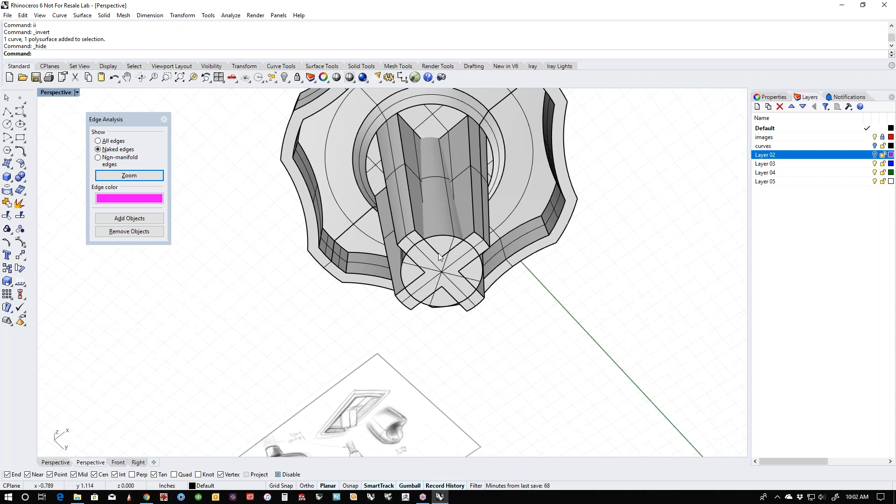Boolean failed. All right, fine. Now why did the Boolean fail? The Boolean failed because Booleans do not like coplanar surfaces, they don't like this situation. So how do I fix that? Well, I'm going to just take this and make it a little taller. And you say, well, that's not what you want. I know, calm down. So now the Boolean worked.

Now I simply just go and trim this off, and cap. And if I want to clean this up, merge all faces, bring this back, Boolean subtract. Ta-da!

Now we can go and fillet this and do all sorts of stuff like that if we want. Ooh, I got a little crazy here. Watch this, I'm going to delete these two, and I'm just going to cap. Merge all faces, and it's all back to good. Okay, I stuck that boss up too far, I poked through there. All right, let me check.

Question: is there a way you can select the point control point without selecting the surface accidentally? There is an option in here when you pick something that turns the points on, and it is... I'm not going to remember where it is, but, mouse. Yeah, turn on control points when selecting a curve, light, or annotation. Allow selecting objects with points on. If you shut this off, when the points are on, you can only select points.

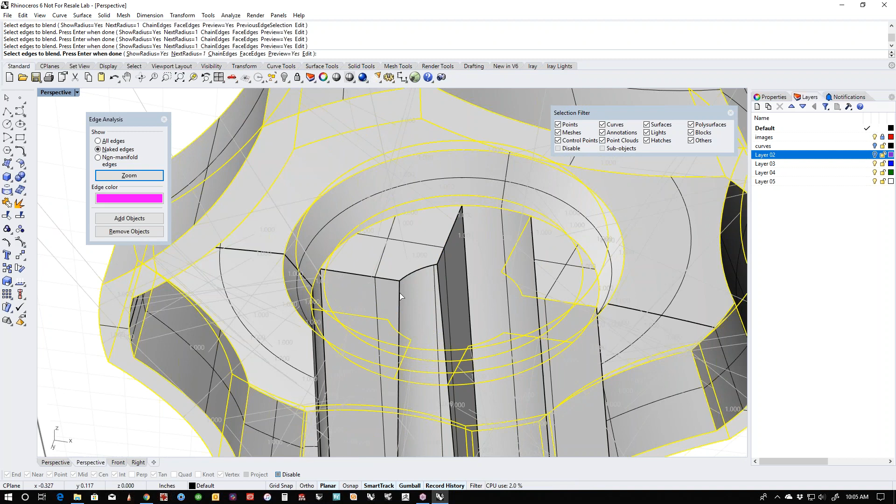All right, so if we wanted to fillet this thing up, we could go ahead and do that. In this case, I'd use blend, and I am going to drag select all of this stuff, and then deselect. I don't need these. Actually, you know what, let's do the whole part, that'll make it look like it was made in SolidWorks. Let's do the entire part. And I'm going to do this as a much... I added way too much stuff. Let me do this, let me kill this.

Set all, let's do 0.02. Actually, I'm going to kill that because you know why? It selected the threads, and I do not want the threads selected. So I'm going to do this again, and then I'm going to drag, control deselect that, and then shift drag. Yeah, I would not want to throw the entire threaded portion of this model at the fillet.

Sorry, it's my daily check-in with my business partner. Does he come to the webinar? No, no, he doesn't.

All right, I'm going to run these as well just to have them. I think that's everything, let's see if that'll go.

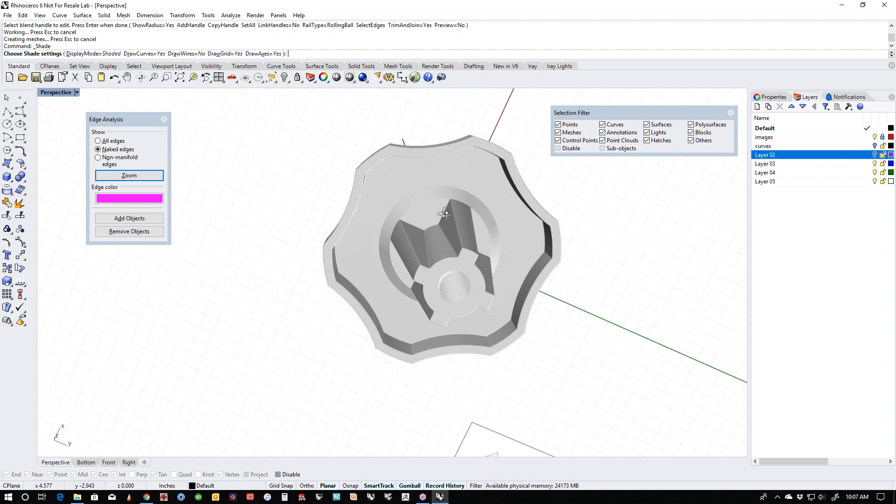Looks like it. And because we use the same size fillet, our tool maker will like us, because they can just use a 0.02 tool to go in and clean this all up, and it'll be good to go.

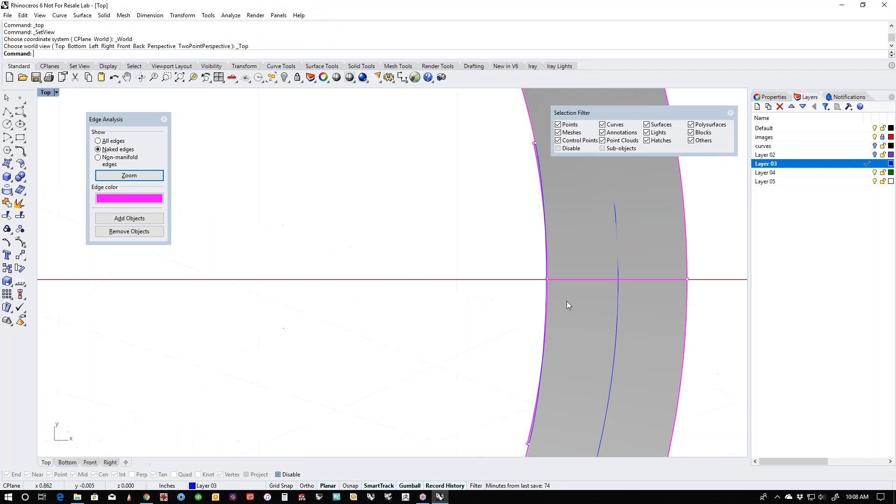It would help if I finished it. Actually, you know what, I'm not going to use a blend, I'm going to use an isoparam. So let's pull an isoparam out of this. Hit the T key, I'm going to snap it to here. Same thing over here.

Doesn't do any good to send out a part if it's got holes in it. All right, so let's do that. I'm not going to do the whole thing, I'll just fix this part so you can see what's happening. This is how you would fix it though. Okay, I'm going to hide that curve, and just blend this edge just to make it easy.

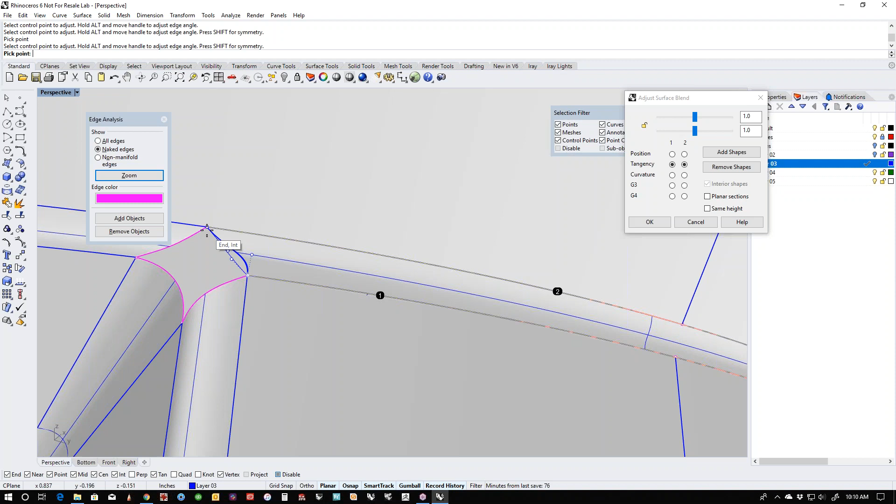Oh my goodness, sorry. I'm going to just do this as tangency. I'm going to alt drag this handle and snap it here, alt drag this handle and snap it there. Same thing over here, alt drag, alt drag. That straightens out the ends of this thing. And then I'm going to just bump these a little bit. See how those redistributed themselves? Say OK.

And then I'll go in here just with a four-sided surface: 1, 2, 3, 4. Same thing over here: 1, 2, 3. Nope. Join those up. And that's what I would do for the rest of these. Actually, what I'd probably do is take this thing and copy it around four times and then just trim it in.

But we want to make sure that we don't have any pink. No pink when we send out a part. So I would go ahead and spin this around, make sure that I have all those fixes. But I'm not going to bore you by fixing all four of them at the same time.

Make sure that you check this stuff, by the way. Make sure that you check naked edges. Make sure that you check SelOpenPolySrf. See how that lights up? That tells you it's not watertight. If it's not watertight, don't send it to someone.

Don't send it to a printer. Don't send it to an engineer. Don't send it to Asia. Don't send it to a manufacturer. Don't send it to a machine shop, because the part will fail. Make sure that your stuff is watertight.

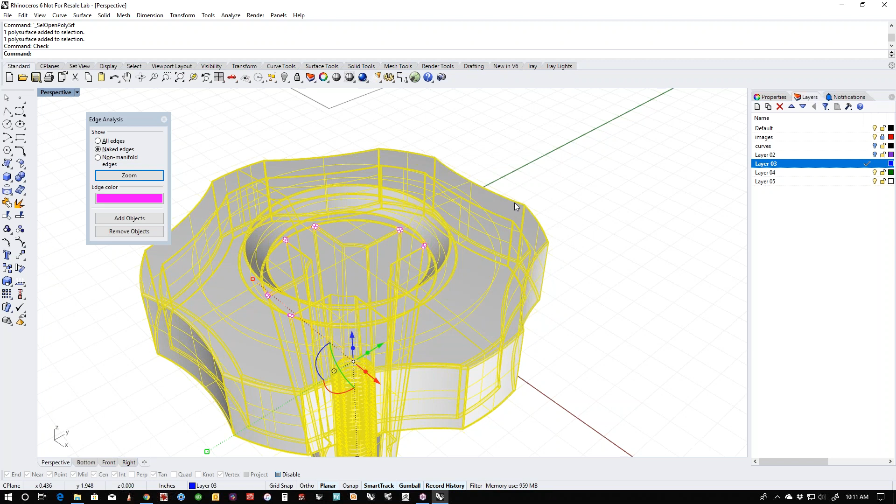Okay, you can also use Check. Check says it's valid, that's great. You can also use What. What says open polysurface. Open polysurface means do not send it — fix it. Make sure that your surfaces are closed before they go out.

All right, so you would want to apply this fix all the way around. Okay, let's build a new one.

Is this helpful? Are we enjoying this? Let's build this guy, because this one seems super complicated. It's actually really, really easy, and there's a neat way to do it.

I'm going to start with an oval, and drag, extrude. I'm going to shift-control-drag to get that edge, and shift-drag to taper that a little bit.

I'm going to mute for a second and clear my voice, my throat is frogging up on me. Hang on just a second. All right, we're back, and it doesn't sound like I'm drowning anymore.

Okay, so the cool way to do this, right? Normally when you do rounded stuff, you start with the rounded thing first. Normally if I was going to build this, what I would do is start with a sphere.

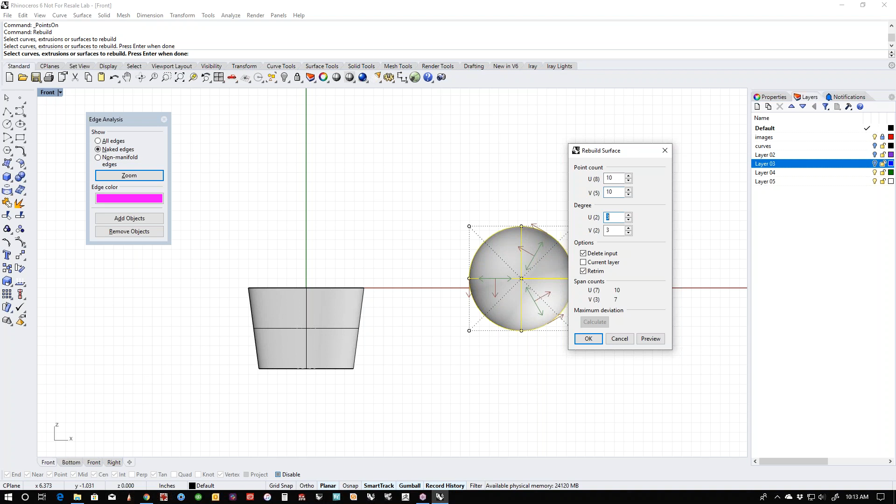I would turn on the control points. I'd actually rebuild this because it has to be editable. I'd do, I don't know, 10, 10, 3 and 3, and edit this thing, then pull points and get my shape. Then I'd hack it off and extrude off of it. That's normally how you build rounded stuff - you start with the rounded thing first, instead of starting with the thing and trying to round the end. In this case, I'm going to give myself a couple of reference points.

One here and one here, doesn't matter. Now, to do this correctly, make sure that you have history turned on - always record history, update children. And then we're going to use the patch tool.

The patch tool is kind of cool. So the edge of this thing and these two points, we're going to use as reference and run it. Just for now, I'm going to do this at 10 and 10 and a stiffness of 1, automatic tangency, automatic trim, and preview. Woo! That's crazy. Let's try this again.

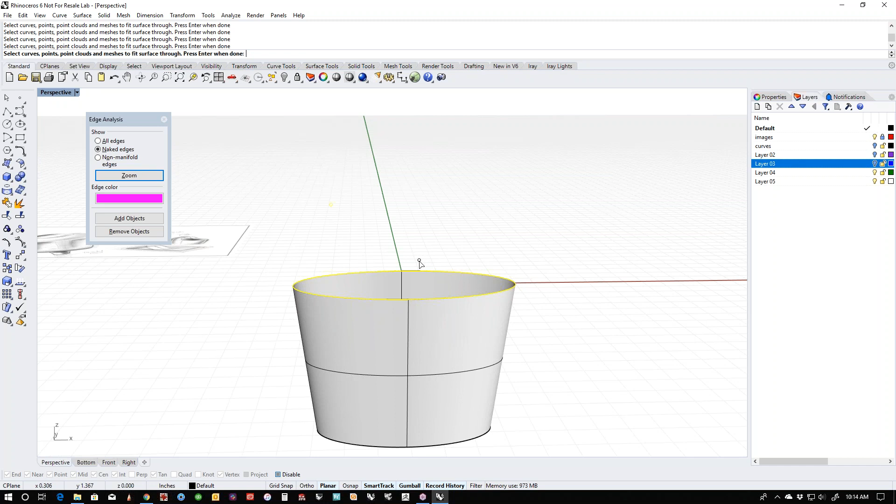I think I grabbed the curve instead - there we go. That's better. So now check this out. We've got a really beautiful thing here, right? A really beautiful part.

Because this is history enabled, I believe patch is history enabled. If I scale this, I can now start kind of sculpting with it a little bit. But check this out - the points are also history enabled. Look at that. So is this one. Look at how cool that is. It's like some crazy Japanese toilet or a button. I can even take this thing and pull it over like this, and it switches.

Now, here's the problem with this. If I take this and try and join it, it may or may not join. It's like a game show - will it join?

Now, there's a really simple solution to this. You just duplicate this curve, get rid of that, and use loft between the two. A lot of people don't know this - loft has a tangency. And we can even rebuild this.

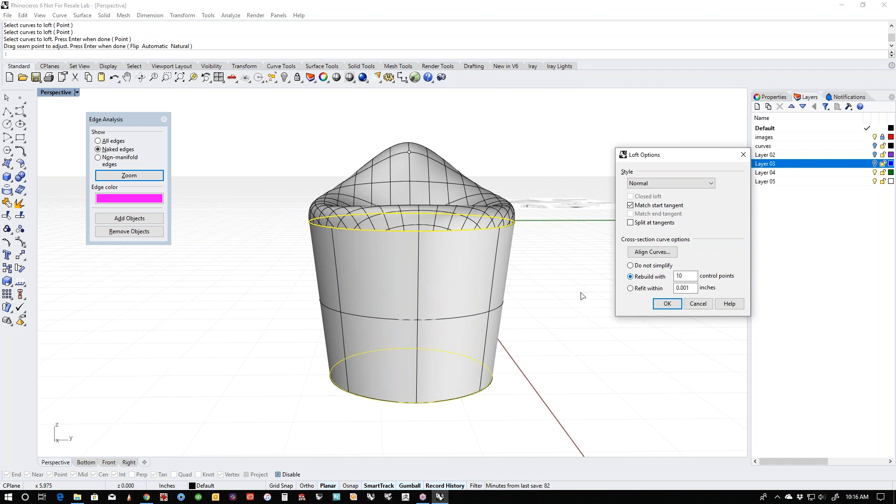And let's refit it. There we go. Loft has tangency - I don't know if you can see that. See that little wiggle in the isoparams? It's actually changing that to be tangent. Now if I join this, it joins up, and you get a really beautiful part.

Now, let's say this piece was critical - you couldn't modify this. We're going to do what's called a pipe trim. A pipe trim is I just run a pipe around the edge. Not that big - come on, settle down. I just run a pipe around here. What it does is it makes a really nice, even trimming object that I can then trim both of these with. Delete it.

Then I can come in here and simply just use a blend. I'm going to chain all my edges together, and I can do this with tangency. I know this is joined now. If I emap this...

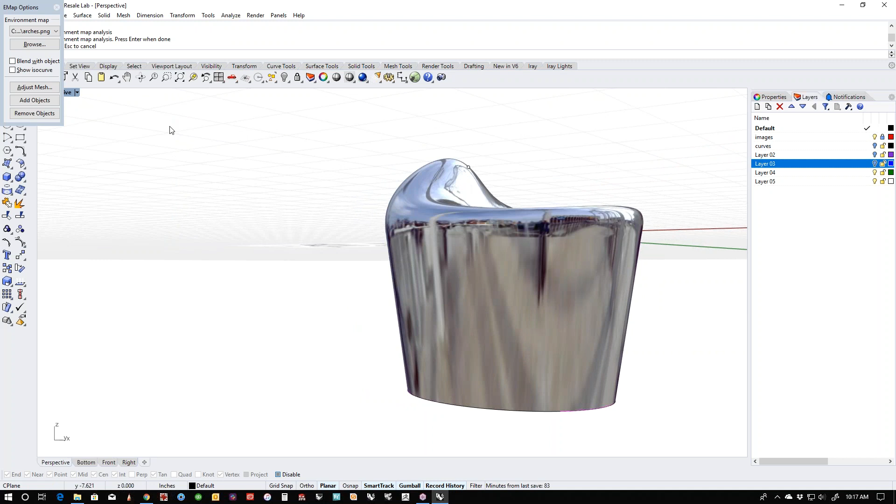Cool, huh? Just a little something going on in here. So maybe what I need to do is - I haven't given this enough room to run. So what I'll do is actually trim this down here and blend a little farther down.

If your blends start to bunch up on each other, it means you haven't given them enough space. That's better. It's still a little - see that joint here? See how that's folding a little right there? So maybe I need to go farther.

Let's do this - split with isoparam. Let's split it way down here, and let's blend all the way. Maybe we add a shape just to make sure we have enough control there. Emap is cool, by the way - it's a nice way to visualize. That's better. Now we've got no bunching.

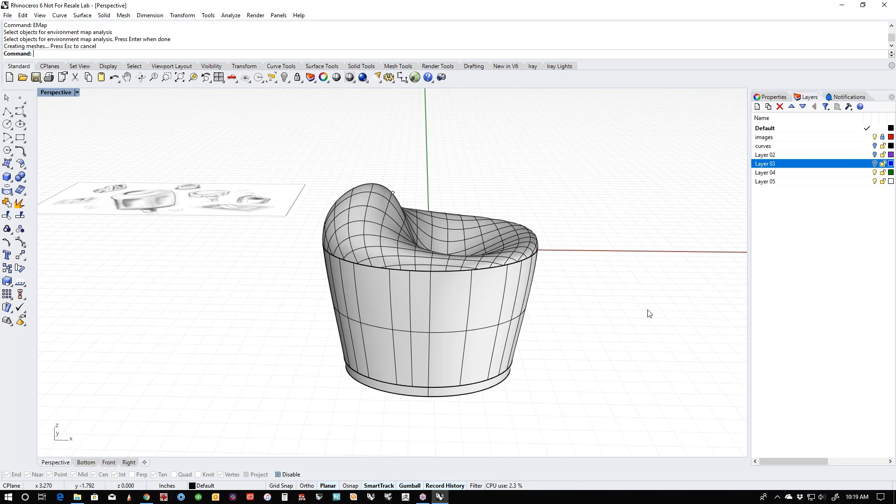Cool. So really nice way to iterate. By the way, I have actually built files where I've saved stuff like this out. I had a cell phone project I was doing years ago where it had to have all these crazy buttons on it. So I made one of these and saved it into a file, then brought it into the file, 4 or 5 of them at a time, and messed with it with history to do all the stuff I wanted.

So let's cap this. If I wanted to go crazy, I could try shelling it. I'm going to go 0.08 thickness on this. I don't know if it'll shell, but let's see. Looks like it did.

Hooray! Let me show you a trick. Let's say this didn't shell - let me show you a cool trick here. Start with an open surface. If you're throwing this through a printer and you need something that's wall thickness, mesh it at a fairly high level. Let's say the maximum edge on this is 0.1. Okay, take the mesh - this is an open mesh, single wall thickness. If you threw this through a printer, it would fail.

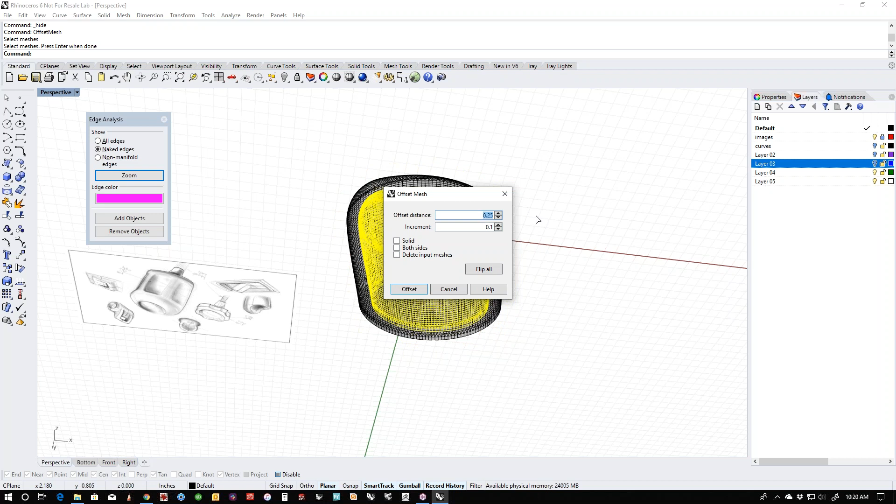Offset mesh. Check this. We want to go in, and we want to go 0.08, and we want this to be solid. And I'm going to explode it just to realign the normals, and we are going to unify mesh normals.

And we've got a shelled wall thickness part. I don't know why it's not rendering correctly. Oh, it's because there's two meshes in there. There we go. The normals were turned inside out. So now I've got a wall thickness part.

If you have a closed piece, by the way, that works also with a closed piece, but you just have to put a little hole in it. So if I try to do this with a sphere, it doesn't work.

I'm going deep into my bag of tricks now. Everybody's like, wait a minute, this isn't a knob. So if I mesh this and I offset the mesh, and I say solid, it's gonna do it, right?

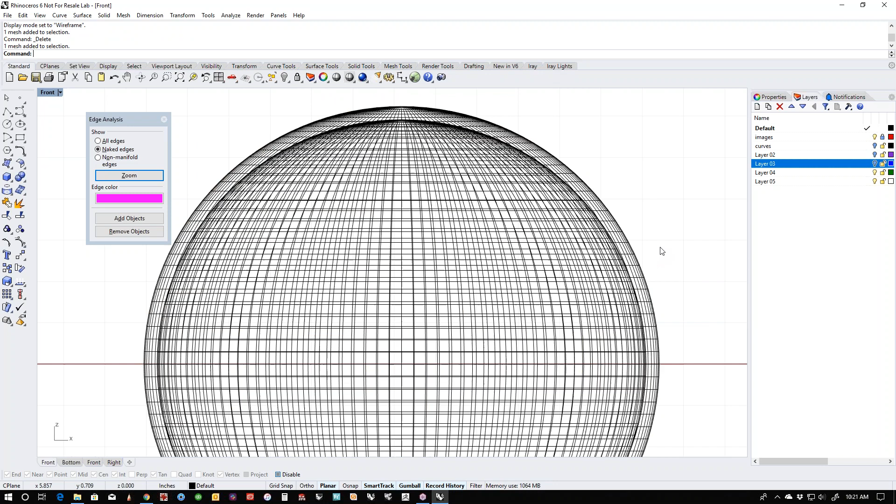There's an inside mesh and an outside mesh. The problem is when the printer sees this, it's gonna see this mesh as an inside mesh and this as an outside mesh. You actually have to connect them. Rhino recognizes this, your printer won't. So what you have to do is you just have to knock a tiny little hole through this thing.

So let's do something like this. And it doesn't have to be both sides, I'm just doing it because it's lazy. But if I do this, now I mesh offset, do solid. Now what you'll see is this thing is now connected.

There we go. Got to make sure your normals are pointed out. And the way to check that, by the way, is to go over here. So there's two meshes stacked on top of each other. I don't want that. Let's do this. See how this one is pointed inside? So we want to flip it. Boop. Now it renders correctly.

If it doesn't render correctly on the screen, fix it. Don't send it to your printer. If it doesn't look right on your screen, fix it. So now those two edges are connected. So now your printer will see this. And then you just put a little dot of super glue on there and sand it off.

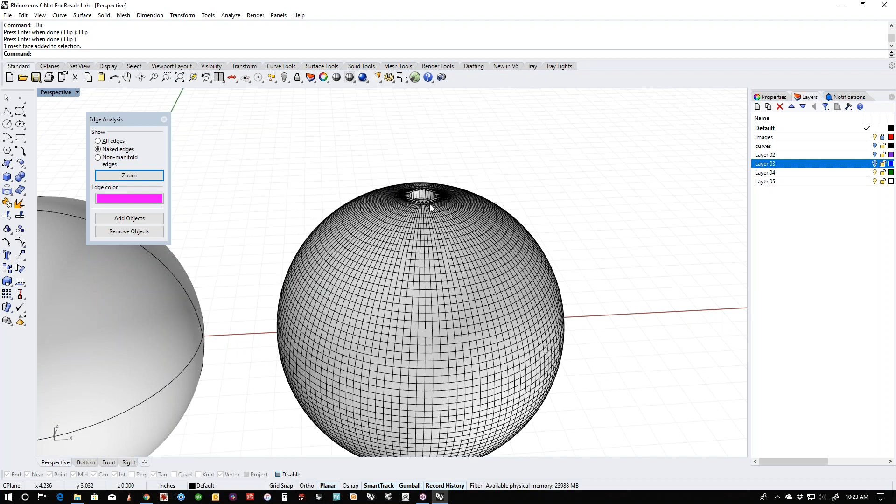Alrighty, 1023. How are we doing? Do you want to see another one, or are you bored to tears? Oh God, everybody's died. I've killed you all with boredom. Another one. Okay, let's see.

What would be an interesting one to do? Let's do this guy right here, because this actually has an interesting little concept that we can use with a deformer, and then that probably will be the end, unless you want to see a different one. But let's do this guy right here. So this one is kind of cool because what we have here, if we look at this, we've got a base object, we've got an object that's offset up off of that, and then we've got a depression that's tangent here, but has a little blend into this corner here. And there's a formula for doing this stuff.

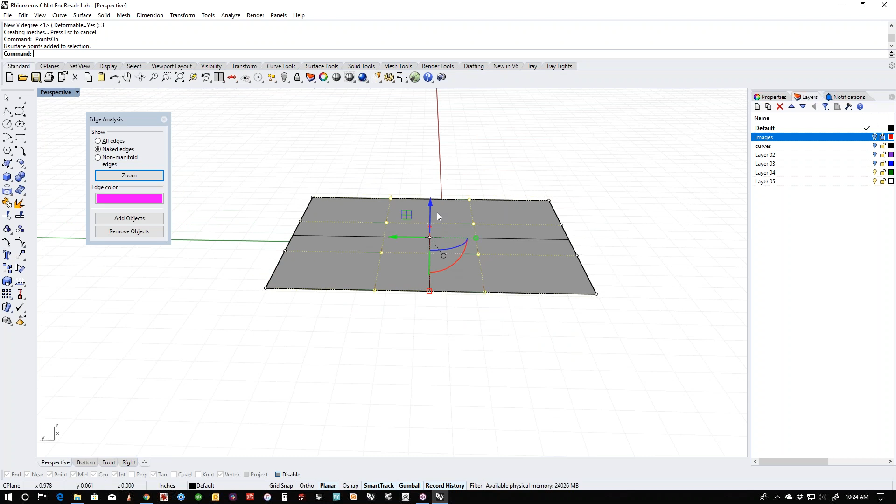So what we'll do is we'll start with a simple surface, right? We'll start with just something like this, and I'm going to hide the image. That way you can't see when I cheat. And let's even add a little shape to this. Let's say it's like a console of a car or something like that. Everything's a car part as far as I'm concerned. All right, so what we want to do is we want to establish what our original button is, and then establish what the inside is.

And the way that we do this is we draw the original shape. And let me center this, because I want to, actually, let's do this. There we go, I want to be able to use symmetry. So I'm going to start at 0 and I'm going to start drawing out. And here's my corner. Actually, I don't want to use corners, I want straight lines. So I'm going to start at 0 and come out here. Take this and move it up like that. And I'm going to come straight back like this. And then I'm going to go to 0. Turn my points on and snap it back flat. And I'm going to mirror this.

There's an easier way to do this, I don't know why I did it like that, but that's our original shape. And actually, let's make it more complicated. That's too, I'm letting myself off the hook too easily. So let's do this. Let's call this our original shape. This will be the outside of our button.

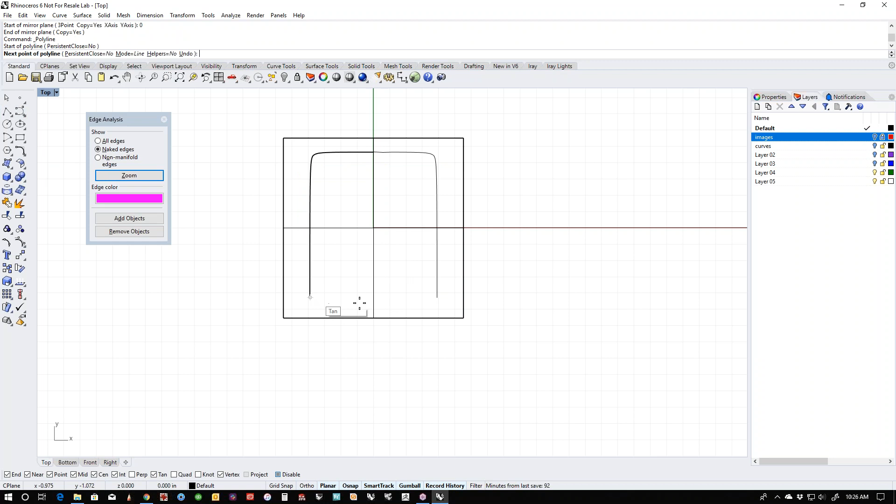Okay, then I'm going to copy these and scale it down. Then I'm going to turn the points on and pull these points over here. Now this is going to be the surface of my button. This is going to be the blend back to the original base shape.

So I want to make sure I have enough room to do that. I'm going to play with this until I get basically what I want. If the button is completely raised, this would be inside this shape. If it's tangent, I'll make it tangent here just because that's a little harder to do.

And then we'll put a secondary tangency inside this thing. So I'm going to take this now and copy it again, shift drag. Copy it again and shift drag. And then these points, I want to be lined up with here.

And then I'm going to just draw a straight line connecting that all out. So actually, this is the formula for doing these things: outside curve, inside curve, and then this is the outside curve, inside curve. So this is going to be the surface of our button. This is going to be the part that lowers down. This is going to be a blend, and this is going to be a blend. So what we do is we take this entire surface and split it using all of these curves.

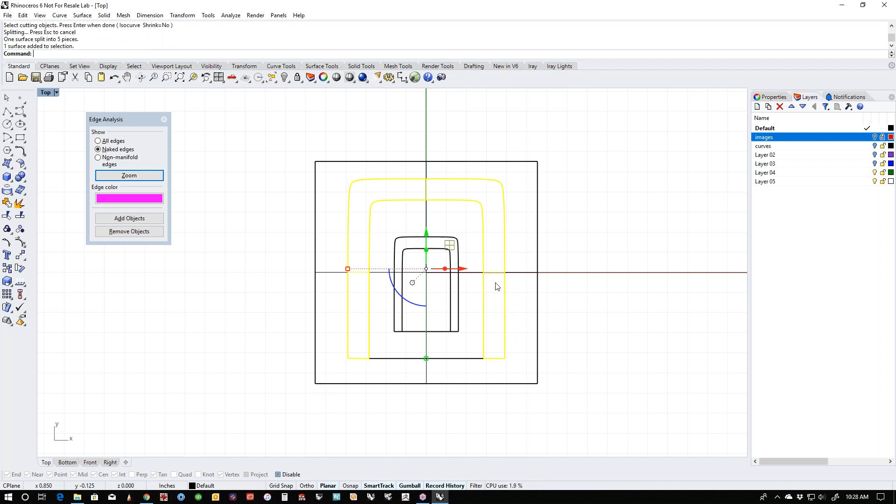And what this does is it gives us a surface here, which we're going to delete. Gives us a surface here, we're going to delete. And then what we're going to do is take this surface, turn its points on, and take it and pull this up like this.

And we've pulled it a little bit too far away from this, so let's do it a different way. Let's take this and bend it, but let's bend the points. So I'm going to take these two points. I'm going to bend them, but starting about here because I don't want to disturb this relationship. Oops, I've been going in the wrong direction.

Let's see, so front is that direction. Right, that's the direction I want to bend it in. So let's bend these points, starting out here, I want to get far. This is the connection point I don't want to break, so I'm going to start like out here and bend this up. And what that does is it raises this thing, but maintains this connection as much as possible.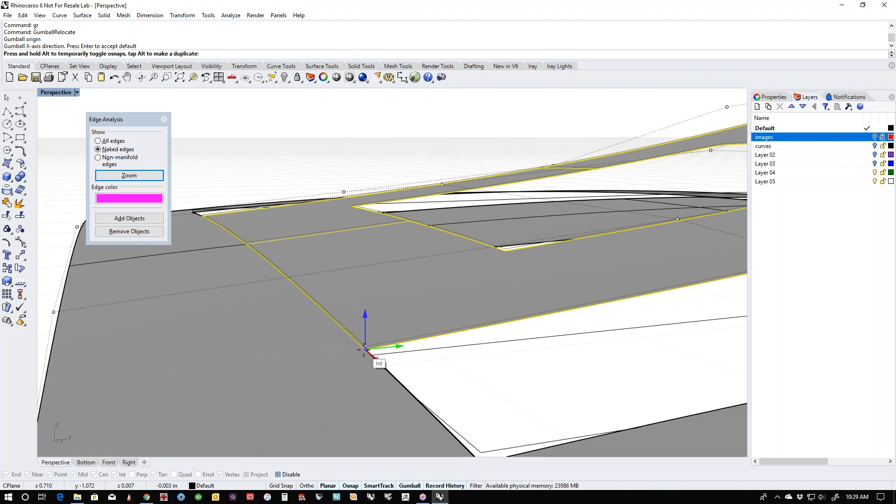In this case, it looks like it's still kind of pulled away, so we may have to deal with that. Let's do gumball relocate, put it here and snap that to that edge. That may be close enough. We may have to fix that, but we'll get there.

Then I'm going to take this guy, gumball relocate here, and then turn his points on. Actually, you know what, let me back up a second. I know how to make this work better. Let's shrink this trim surface. What that's going to do is keep these points much more in line.

So this connection is going to maintain itself. See how these points are now right on the edge? So now if I take these points, go to the right-hand view, bend. Now why am I bending the points and not the surface? If I bend the surface, it rebuilds and gets really complicated. See how it added all these extra isoparams? It's not crazy here, but if I did a big bend, it would do a lot.

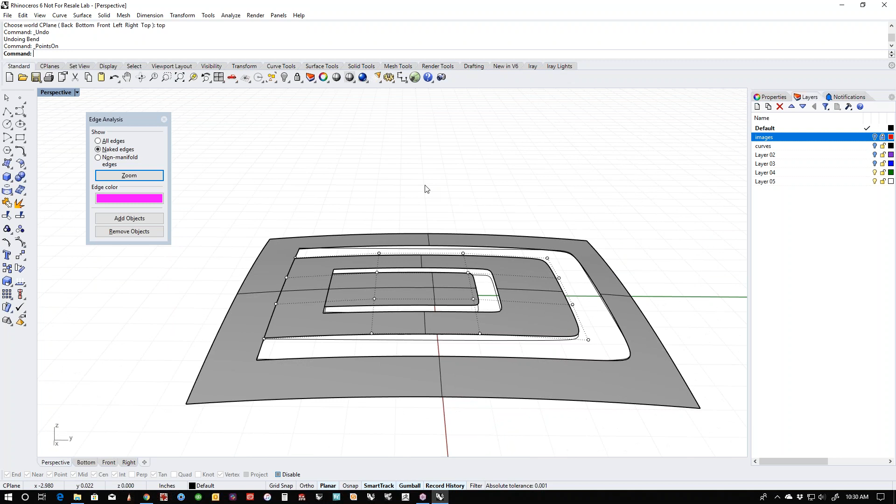If I bend the points, it doesn't. And I'm going to leave these points alone, and just bend from here to here. Bend that up. Now this should still join, and it does. So we haven't broken that connection. So let's do the same thing.

Actually, you know what, I went one step too far. Let's go back, I need to do this in two steps. So let's split this surface using these. Delete that, because I'm losing the connection here when I bent that up. Shrink trimmed.

Turn the points on, grab this, bend. This still joins, just checking to make sure. Now I split this.

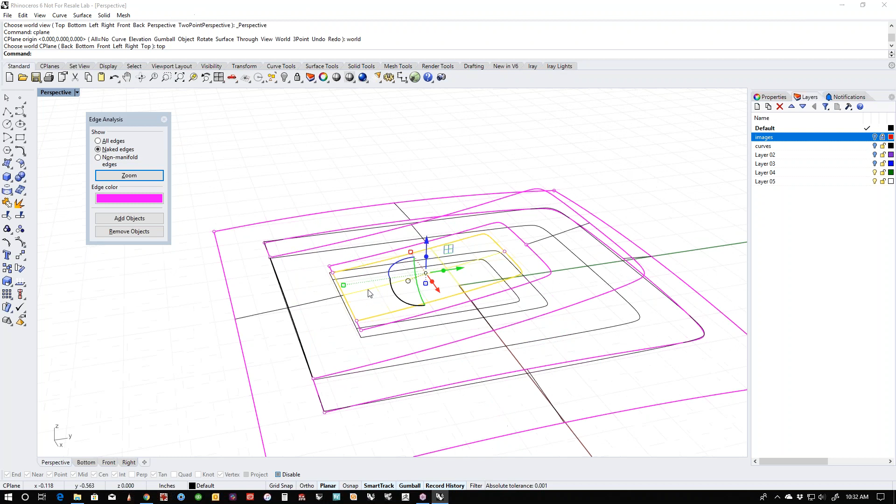This is the object, come on, this is the object to split. I'm using these guys, I delete this. Pick this surface, shrink, turn the points on.

Grab these, and start here and go down. This should still join. If it doesn't, make adjustments so that it does. And then all we have to do is come in here and blend. I'm going to back this off just a hair so those isoparams don't get quite so tortured going around the edge.

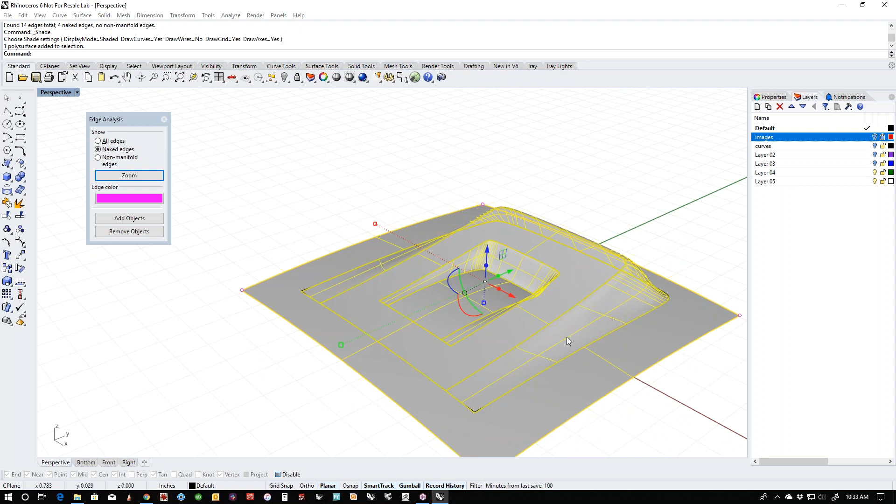Now, if you really want to get into the weeds, you could even do this with a blend and leave it at position. That seems a little counterintuitive. I want to get rid of my interior shapes, I want that to simplify. It's a little counterintuitive, but then that gives you the option of really getting in here, and we could blend this edge.

Let's preview it. Too much. Still too much. There we go. And really start getting into some subtleties.

Okay cool, you like that one? This is one of my favorites. I use this for hood scoops for cars, intakes for motorcycle fairings, bezels for switches. You can imagine a toggle switch thrown in the center of this thing.

It looks all fast and furious-y. Something like that. We could take this guy right here, build it, and stick it in here, and it would look all cool and integrated.

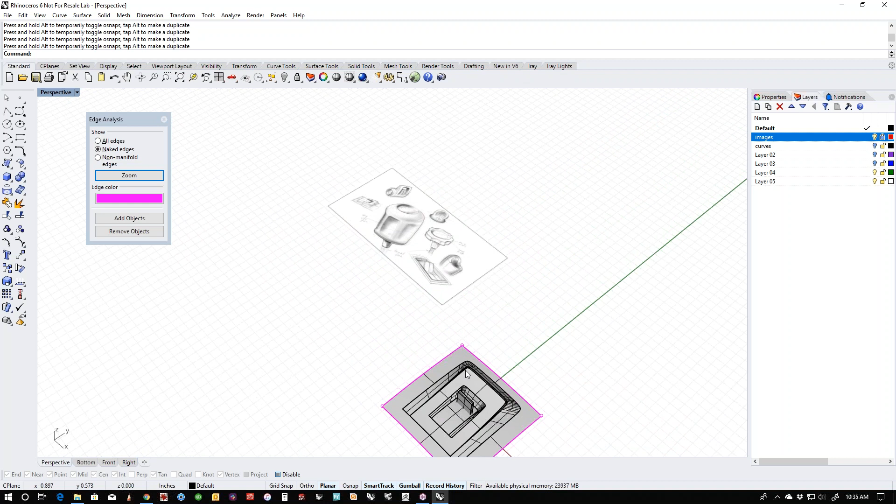All right, we're about 10:30. How we feeling? You want to see another one, or are you done? I'm good either way. I think we have time for one more if you want to get crazy. If not, we can call it a day. You guys have had to listen to me long enough.

You gonna build this guy? Let's build that one, I think I can pull that one off relatively quickly. So let's throw this one on a layer. This guy has a little flat, it pops out, it has a little roundy, makes a tube, has some little details in here, and has a little piece up here that looks tangent, which makes it a bit more difficult but not impossible, because it looks like all the tangency happens within a quarter. Let's give that one a shot.

We could actually do this with point editing, which would make it super interesting, or we could model it implicitly. Let me try with point editing and just see. Let's give it a crack. So let's start at 0, come out.

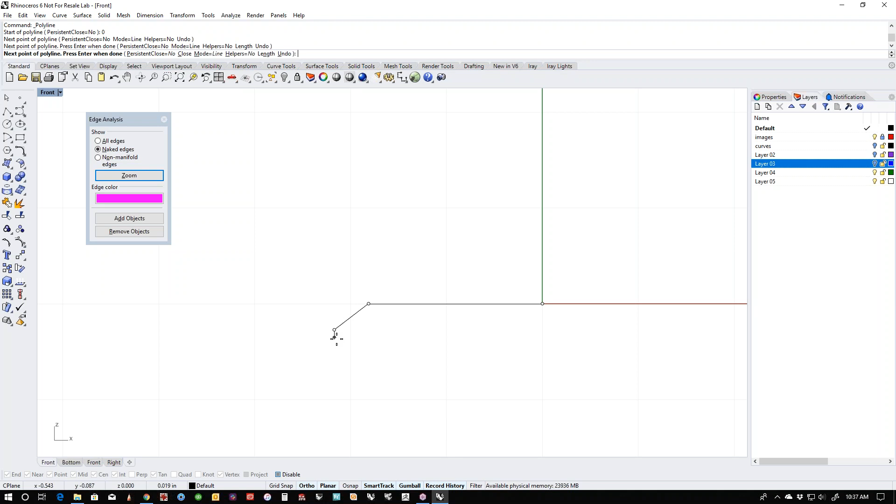I'm going to just do this sharply. And then I'm going to take this and gumball relocate. I'm going to put this up here to 0. And then let's go ahead and add some fillets to this. Why not? We'll do this a little differently this way.

So let's fillet that. Let's fillet that. Let's fillet that. Actually, let's not do that last one. Let's do this one. Nope. Fillet's too big to fit in there. There we go. Let's do that, so we'll call that done. Whoa, tiny.

All right, let's revolve this, and I want to revolve it from here. I want to revolve it this way. And we can mirror this, but I'm not going to do that just yet.

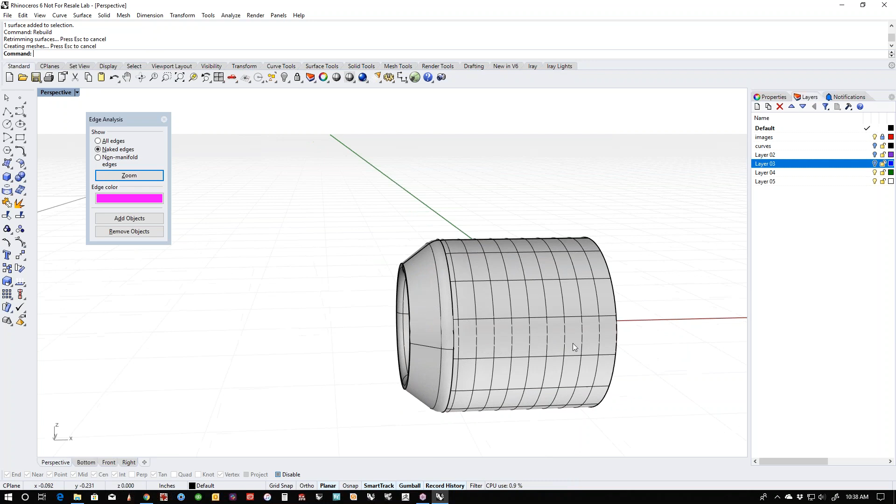So if we want to do this with point editing, let's explode this, and then let's split this with isocurve to here, and then let's rebuild this to, I don't know, let's do like 15 and 15. And then let's turn points on and see what we can get. So this is our quarter points here.

So I'm going to grab these. I'm going to leave these alone. I'm going to grab all of these. And I don't want to get these over here. Now let's see what happens if we just go burp.

That's kind of what we want, but we need more points because I don't have enough points to get... well, maybe I can just modify these. There we go. And then I can take these. Yeah, that's kind of working. And then I can take these. And then I can take these.

Those last ones need to stay put because they need to stay in line with these guys, but I can move them down.

Now I've lost the connection here, but I'm actually okay with that because I can always split with isoparam and blend.

And I would need to add some shapes in here, clearly.

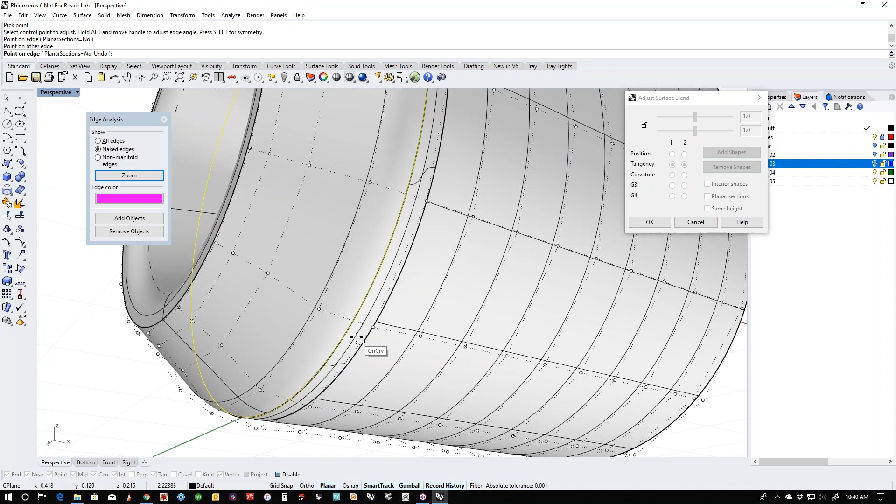I'm going to shift drag these out a little bit. Those are okay. I'm going to shift drag these out a little bit more, but I'm not in love with that. We'd have to maybe give this a little bit more room.

Maybe blend from like here to here, so let's do that. That probably is going to work better.

I add these shapes to give the isoparams a little bit more room to run.

I don't like how this is coming off as a straight line, so I'm going to Alt and change the angle of that. That way it follows the shape a little bit better.

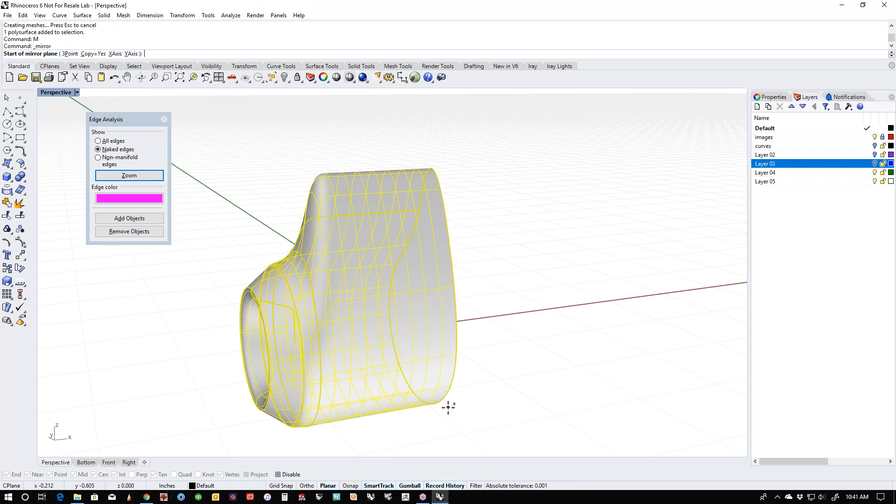That's better, I like that. Join it up, let's mirror it. It's really fat, so let's scale it.

And then let's blow a hole through it. The hole kind of needs to go through here, so let's use the same formula we did before. Let's draw this kind of like that.

Completely making this up as I go. And I may actually make a rounded hole at the bottom of this thing, so let's do this.

Because what that does is it gives me the opportunity to use a blend instead of having to try and surface model my way out of this. And that'll become apparent here in a second.

So let's trim through this. And then what we should be able to do, if everything was working correctly, is blend from this guy to this guy.

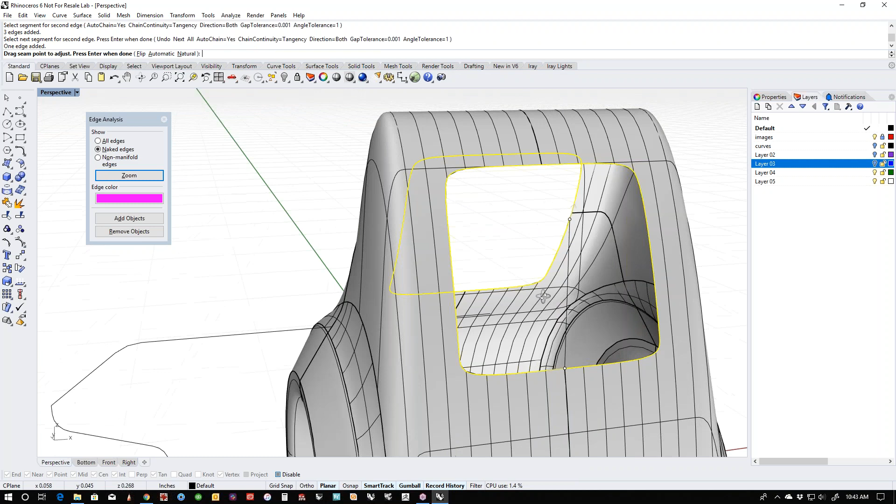Let's make our shapes approximately in the same direction, going the same way. I'm going to lock these together and drag them back, and it's not giving me enough, so I'm going to override it.

See how these isoparams are crossing down here? Check this out, I can explode this and turn on my isoparams, or turn on my curves, my points, and I can grab this knot of points right here.

And go over here, and go move UVN, smooth in the U direction, and I can untie those. Yeah, bet you didn't know that one.

I just have to decide, because it's not symmetrical the way I did that, which side I liked better. Let's see if it'll join up still.

And I like the side that's joined over the side that isn't joined, so I'm going to just do a center line.

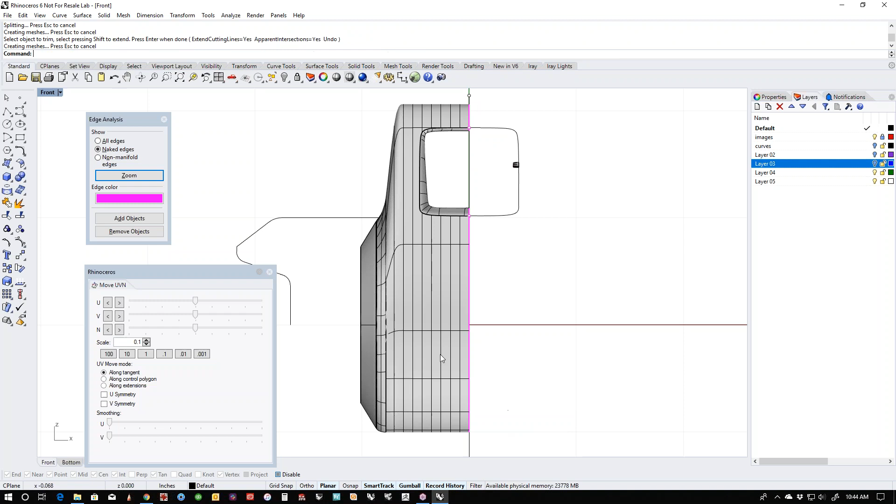Trim, mirror, something like that.

Now, granted, if I wanted to get this detail to pull out a little bit, I would have to trim, and do a little bit more complicated blend on that. I'd have to pull this down a little bit and then blend from here to the bottom, and then blend the sides together and all that stuff.

But, add a few little details on here. Let's pull a few isoparams.

Isolate the curves. I'm going to mirror these, and then I'm going to pipe them.

And let's do a pipe radius of, let's do something small.

Boolean those together, get rid of those little danglers, and there's our little detail.

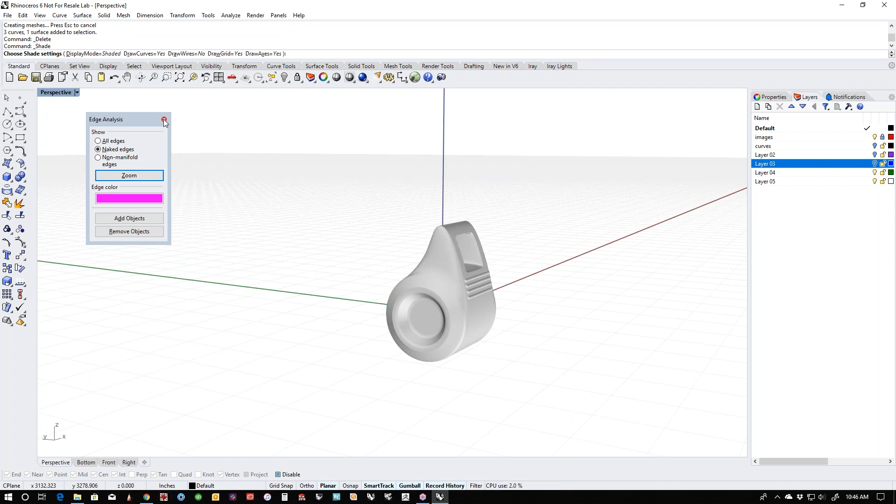Which is cool if we have this thing, because I can bring this guy back, and that fits in there kind of nicely. Looks like something Vin Diesel would use to launch his car.

We've got a cool little setup, right? Cool, everybody happy with that?